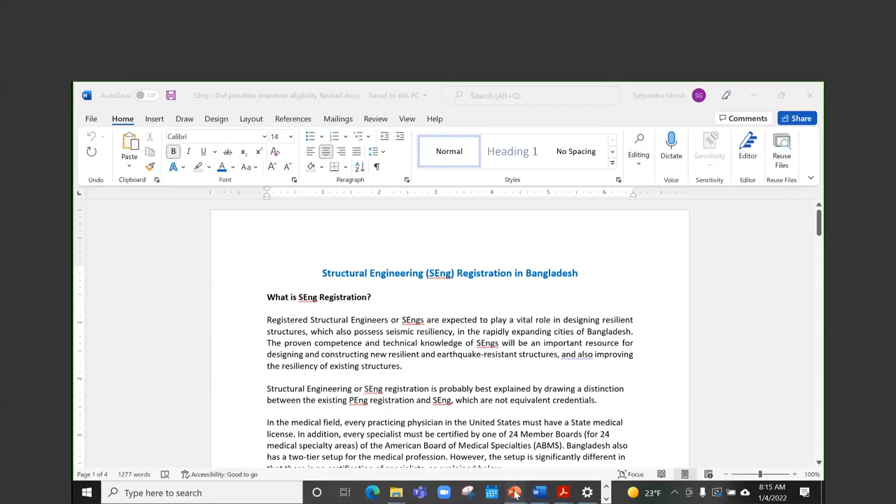So we have a two-part presentation today. The first part is just a general introduction to building codes. We thought that would be an appropriate beginning to the whole program.

Dr. Ghosh, first question. You're not on slideshow mode, or presenter mode. Oh yeah, okay.

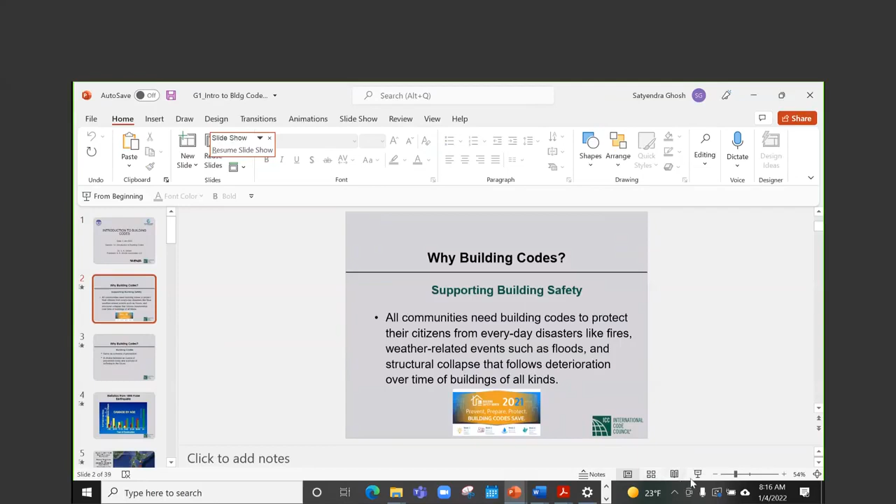The first question is, we are spending a whole lot of resources and effort in trying to get BNBC 2020 implemented first and then enforced. But why? What is the importance of building codes? Why building codes?

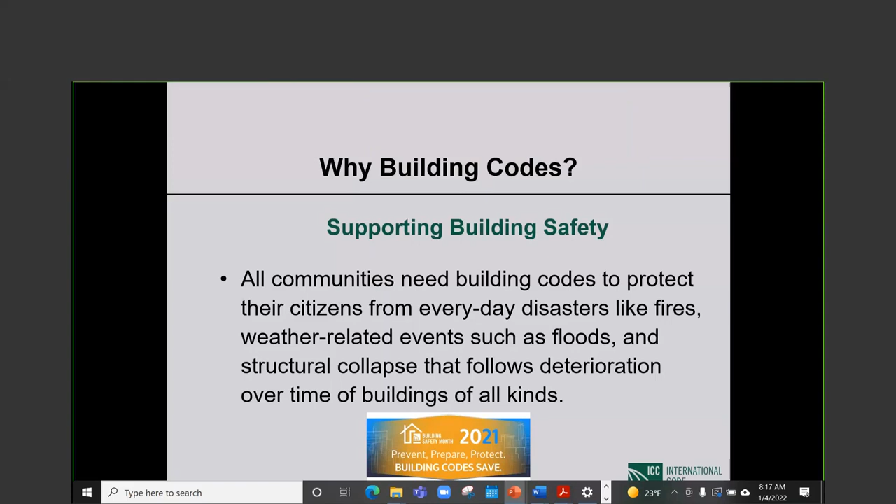So this is very basic. All communities need building codes to protect their citizens from everyday disasters like fires, weather-related events such as floods, and structural collapse that follows deterioration over time of buildings of all kinds. Age-related deterioration ultimately will destroy any structure, and to the extent that we can take steps to preserve structures to prolong their life, that also belongs in building codes.

Building codes serve as a means of prevention. This is truly in a very basic sense. Building codes prescribe preventive measures to keep bad things from happening. It provides us with a choice between an ounce of prevention today and a pound of suffering in the future. If we build code-complying structures, chances are very high that for many decades the structure will serve our purposes satisfactorily with minimal maintenance. But if we don't do things right in the first place, we do not comply with the code, we cut corners, then the consequences can be quite unhappy and may result in a whole lot of suffering.

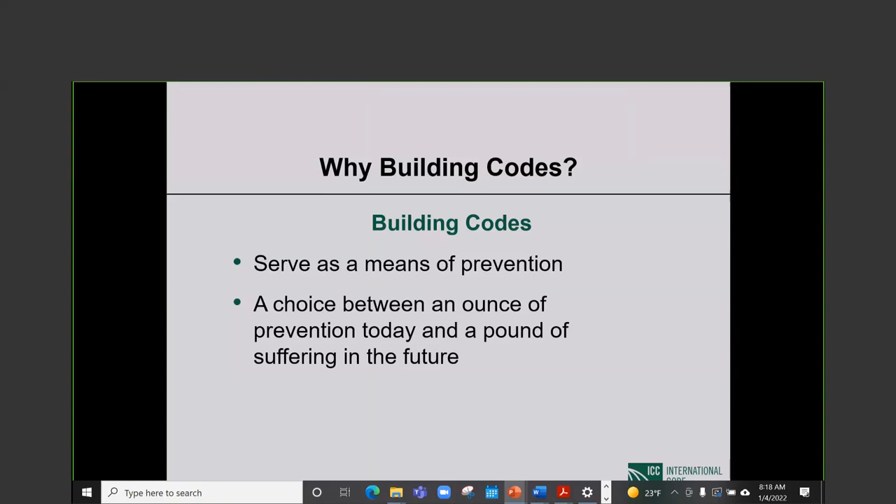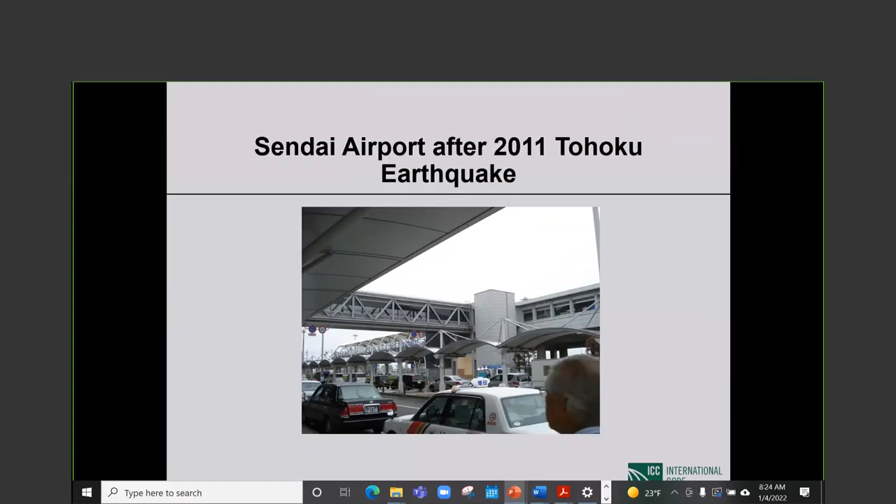We saw damage. It was not damage free, but considering the magnitude of the earthquake, the damage was very light indeed. When we came out of the airport waiting to be picked up, this is what the city looked like. You look at the traffic. There was essentially no sign of an earthquake having taken place just 3 or 4 weeks before. If you looked hard, yeah, there were signs, but there was basically not a whole lot to see.

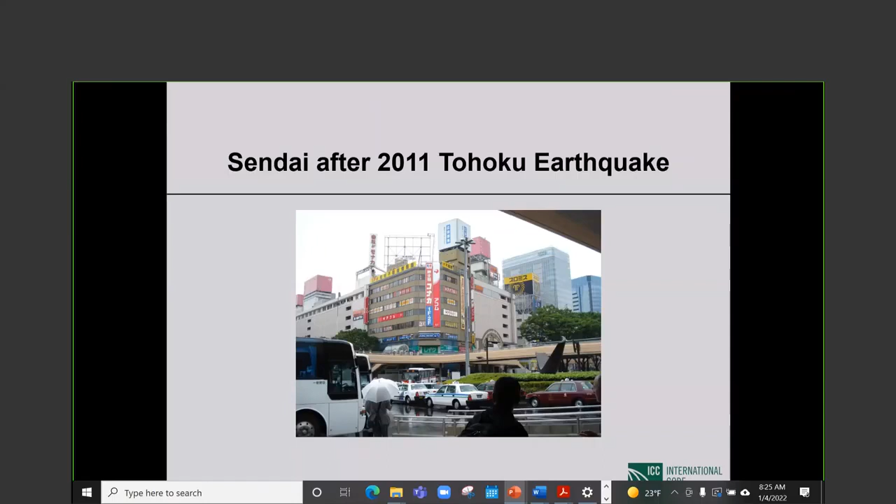So I'm not saying that there was no damage, but if you drove around the city, you might not see a whole lot until somebody pointed things out to you. And then you did see earthquake damage. Now, we were taken to the campus of Tohoku University just outside of Sendai, and many of the university buildings were old. This is one of them.

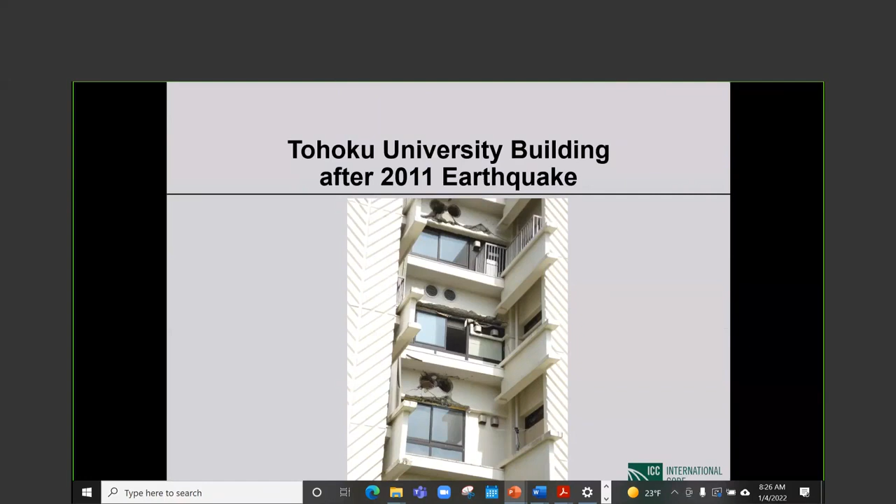These are shear walls that are coupled, as you will see in the next picture. These coupling beams between the shear walls had openings for some reason. I do not know why. And those suffered pretty much as expected, very major, very substantive damage. And then the columns of the building, this is an older building, the columns had the pre-1981 detailing. This we would call non-ductile detailing.

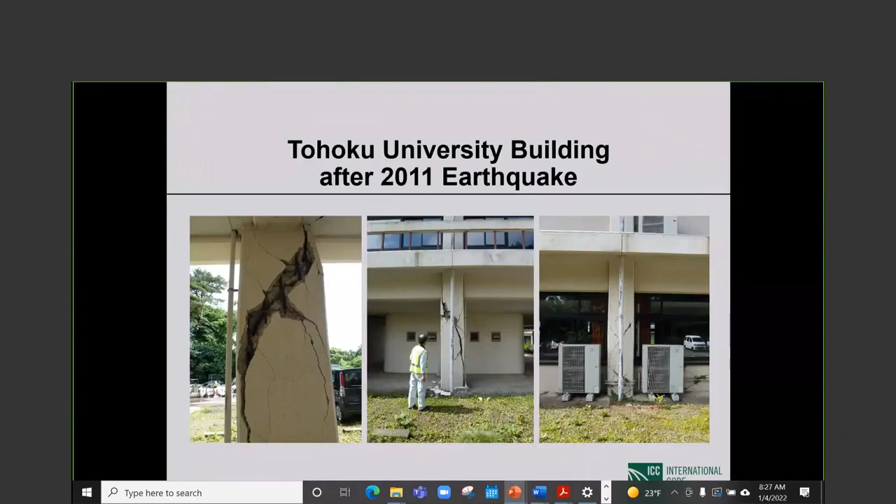The main feature of which is that you have plenty of longitudinal reinforcement, but hardly any transverse reinforcement. There are typically ties at 14-inch or so spacing. The ties are once around, there are no cross ties or anything, and the hooks at the ends are 90 degrees. Everything is wrong. And those columns always suffer shear or shear compression failure, as you see in these pictures. So in this older building, there was plenty of damage to be seen, but as I mentioned, buildings designed and built by the later codes did incredibly better.

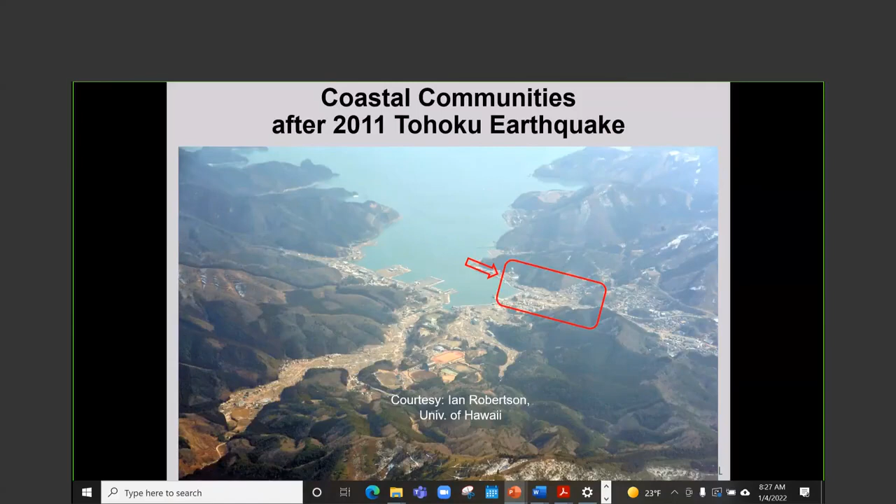The tsunami was a totally different story. All the coastal communities, there were fishing villages or fishing towns, and this is one of them. I don't remember the name now, Onagawa, something like that. You went to any of these places, and we went to many. It really is very depressing even to watch. All you saw was an occasional concrete building still standing up. When I say building, it is the skeleton of the building. Everything else is gone.

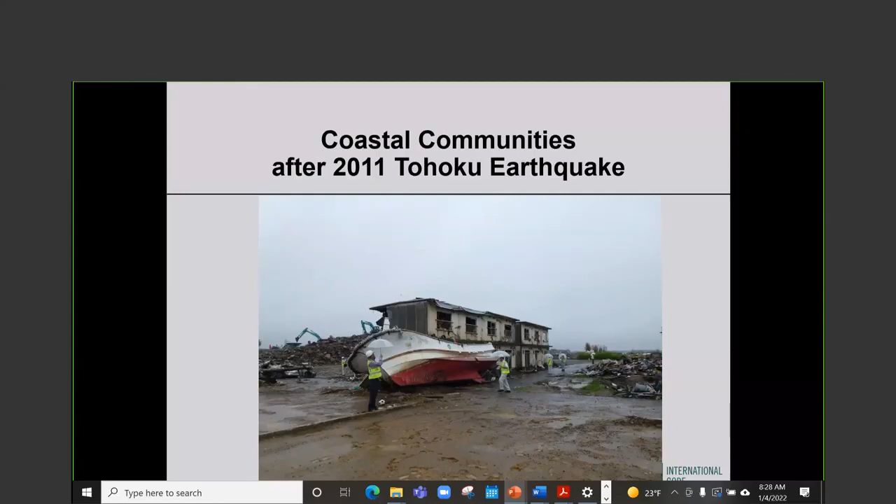People's possessions are all over the place. Children's shoes, family photographs, clothes. Typically they were collected in heaps, and other than some workers, there was no one around. It was total, complete devastation. In stark contrast with what happened as a direct result of the earthquake. So tsunami is a different story. We will not go into that today.

But my point in showing you everything so far was that Japanese building codes are technically sound. Much more importantly, they are very strictly enforced, and as a result of that, I would say all post-1981 structures, particularly post-1991 structures, have performed very, very satisfactorily in recent Japanese earthquakes.

Earthquake threat is not taken seriously in Bangladesh, at least by the public, although the World Bank seems to be very aware that it exists and that it may cause very, very serious problems.

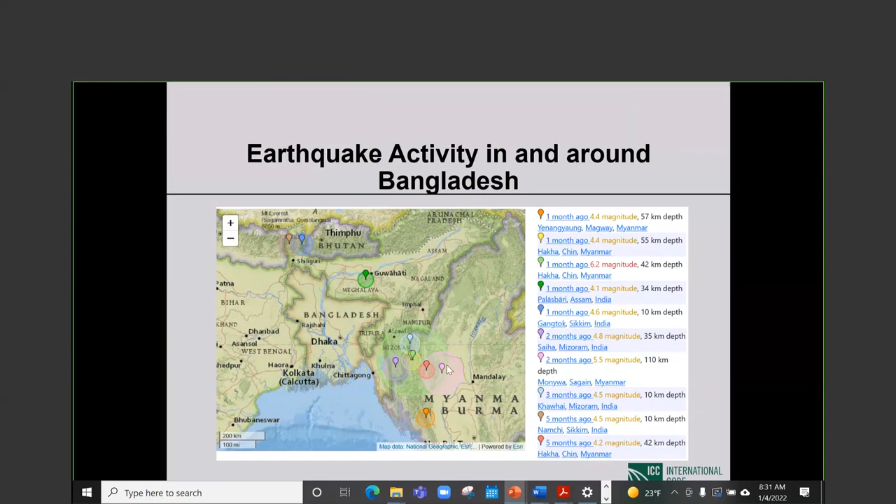And these are the epicenters of earthquakes in the last month or so. So there is earthquake activity going on. Luckily, the largest one in the last month has been 6.2, and the epicenter is far enough away, at least from Dhaka, not from the border of Bangladesh, but a larger earthquake closer in, you can easily appreciate, might cause much more severe consequences.

Earthquakes are natural disasters. The disaster that really has haunted the public in Dhaka and in Bangladesh is the man-made hazard of fires. I will mention only two: the Chawkbazar fire of 20th of February, 2019. This is what happened. A fire, and much of these things should not happen. That's the point. A fire started as a result of a road accident, of all things, between a pickup van and a private car. After the collision, a gas cylinder stored in the private car exploded.

The first place the flames hit was a chemical warehouse on the ground floor of a 5-story building, and the flames quickly spread through 4 other buildings, including a community center where a wedding party was on. The fire left at least 80 people dead and 50 others injured.

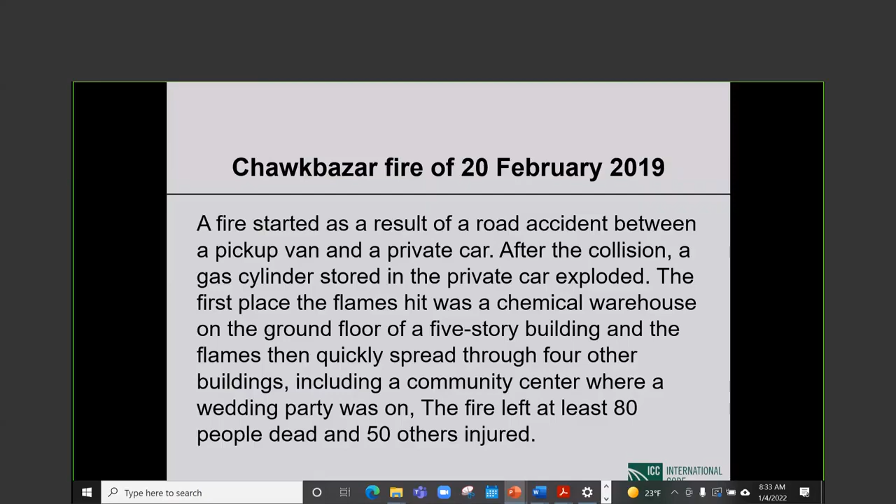So imagine this is a chemical warehouse on the ground floor of a building where people live in a congested neighborhood. This definitely is not permitted by any code. This should have been detected by enforcement personnel and totally gotten rid of. Obviously, that was not the case, and people died. Dying is kind of final. What also happens is people get injured and people become homeless. There are endless dire consequences to deal with by the families and by the authorities, and it's just a tragedy all around.

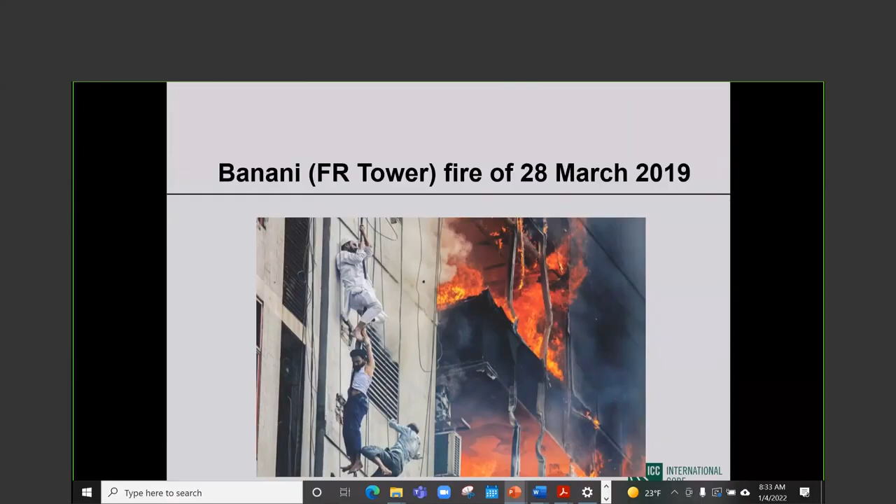The more recent, the FR Tower fire in Banani. This was March of 2019. The FR Tower, which was built before 2006, did not have a single fire protected staircase, and the main staircase was filled with choking smoke.

At just 0.6 meter, the spiral staircase outside, and 1.2 meter wide, the main staircase inside, the building's 2 exits were too narrow for people inside to leave easily. They were also blocked by obstructions that made the task even harder. Office workers able to reach the top of the building were rescued by Air Force helicopters.

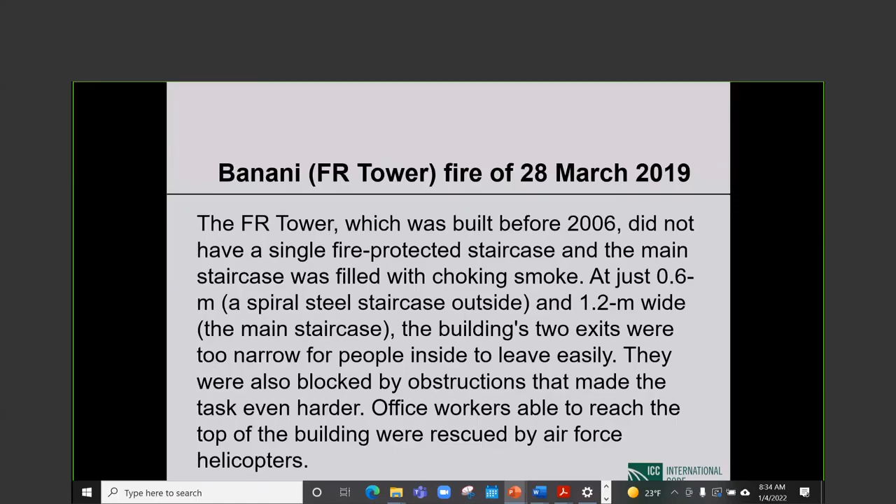This is now the telling thing. According to news reports, the Bangladesh Fire Department had sent 2 letters in the prior 2 years highlighting the dangerous lack of safety in the building. Authorities knew the multi-story block was unsafe. The tower building, in fact, was supposed to be just 18 stories high, but was illegally extended to 23 floors. All of you know all these stories, and even the details, but the point is that code violations lead to major tragedies that are totally avoidable.

Okay, why building codes? Building codes are minimum requirements. That is extremely, extremely important. Building codes always give us minimum requirements established by society that ensure an acceptable level of safety of building occupants and protection of property. That is not the primary aim of a building code, but protection of property is considered in formulating building codes. Minimum requirements established by society that ensure an acceptable level of safety of building occupants and protection of property.

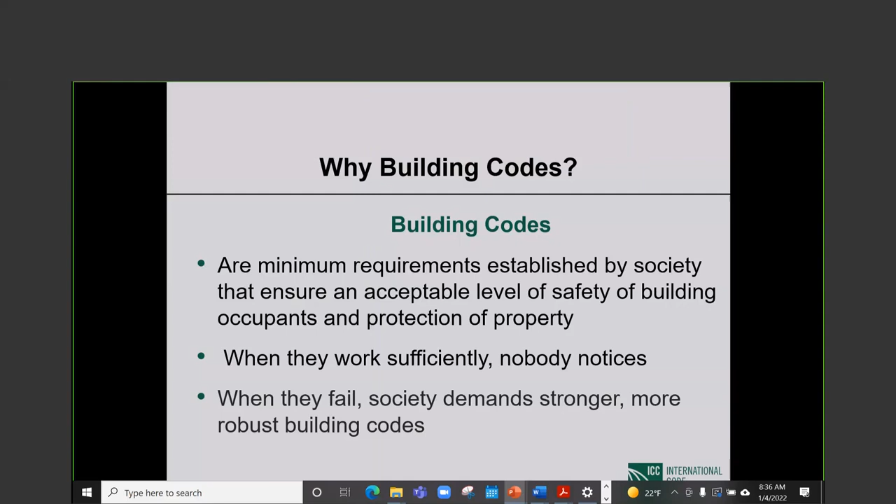When building codes work sufficiently, nobody notices. It seems like it doesn't have to be said, or that it is a trivial statement, but it is actually important. When building codes work, it's like when your body works, you take it for granted. It is only when it doesn't work that you get concerned, you pay attention, you do this, you do that. And it is the same thing. When building codes work, nobody notices. When they fail, society demands stronger, more robust building codes. And then we react and sometimes overreact and do things that need to be scaled back.

Evolution of building codes. The first known building code was the Code of Hammurabi. This is 2000 BC, roughly. And Hammurabi not only had a building code, he had a comprehensive code on essentially how life should be conducted in all its facets. And some of it is very interesting reading, just like the building code.

In the case of collapse of a defective building, the builder is to be put to death if the owner is killed by accident. So this is eye for an eye, tooth for a tooth kind of a thing. So the builder is to be put to death if the owner is killed by accident, and the builder's son will be put to death if the son of the owner loses his life.

The interesting part to me is no mention of the daughter or wife or anything. It's the builder, the owner, the builder's son, and the owner's son. I guess 2000 BC, that's how society was. But anyway, very simple concept. It is about building falling down, structural stability or failure, and the punishment is rather severe, as you can see.

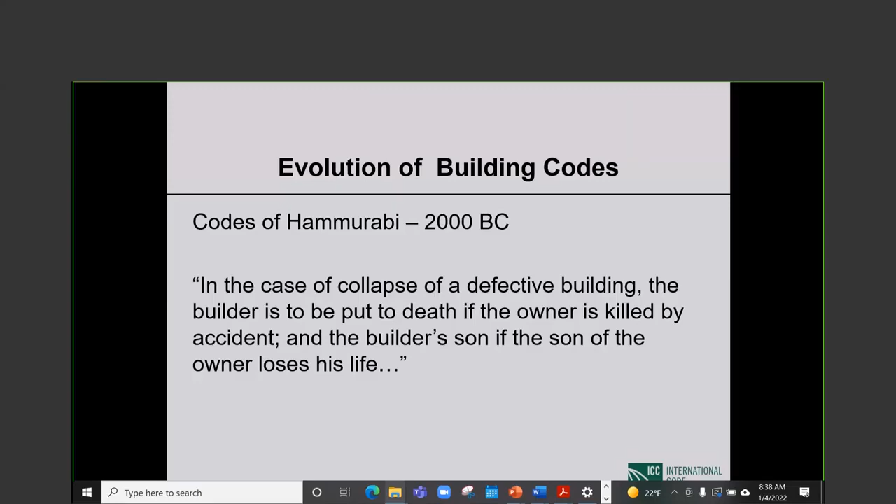Now, this is, I think, a very important slide. So we started with the Code of Hammurabi from the Babylonian times. Structural safety was the only thing that used to be considered. I don't know how much later fire safety became a very significant issue to be dealt with in building codes. So it was not just structural safety, it was fire safety. Then it became the health, safety, and welfare of the occupants of the building.

If you breathe the inside air, are you going to get sick? That kind of consideration. Okay. Or even like you have steps that cannot be easily seen, then people are likely to fall. There's a health hazard that you have created inside the building. So that kind of consideration came into codes. Later on, durability became a consideration that was also incorporated into codes.

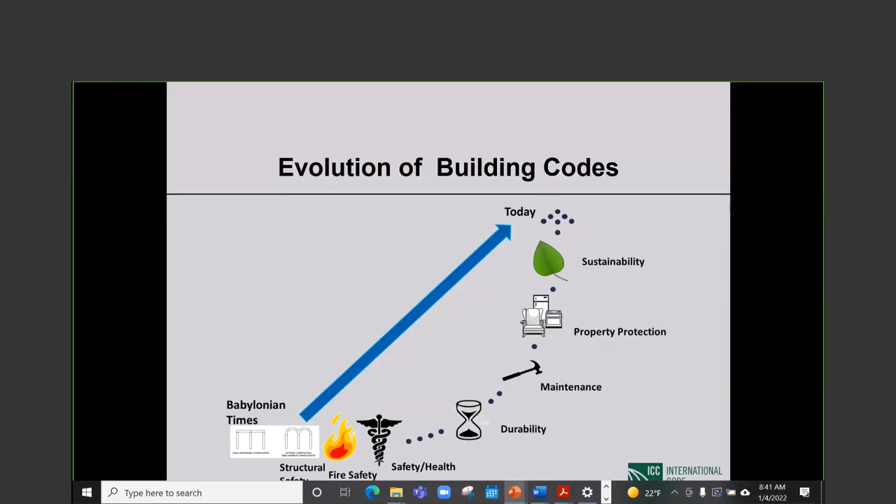And the final thing today is resiliency, not just seismic, but resiliency, meaning a whole community being able to bounce back quickly after a natural disaster. That is now seriously becoming a code consideration. And I expect that in the next 6 to 10 years, there will be major strides made, at least in the United States.

So today, the role of building codes is more holistic, and they have a greater impact on communities beyond that of safety of the building occupants. There is focus on higher performance, need to preserve scarce resources, energy, and water efficiency. Also, allow for innovation in building design, materials, systems, and methods. That has been coming in gradually, and all of these things can be discussed at some length, but obviously this is not the occasion.

So continuing on the same vein, today the role of the building code is more holistic. Affordability in housing, to support availability, to support affordability, the so-called low-cost housing. Even that has come into some codes. How to make livable structures at lower cost. Can the code do something to facilitate that? Then community needs for greater resiliency, which I mentioned already.

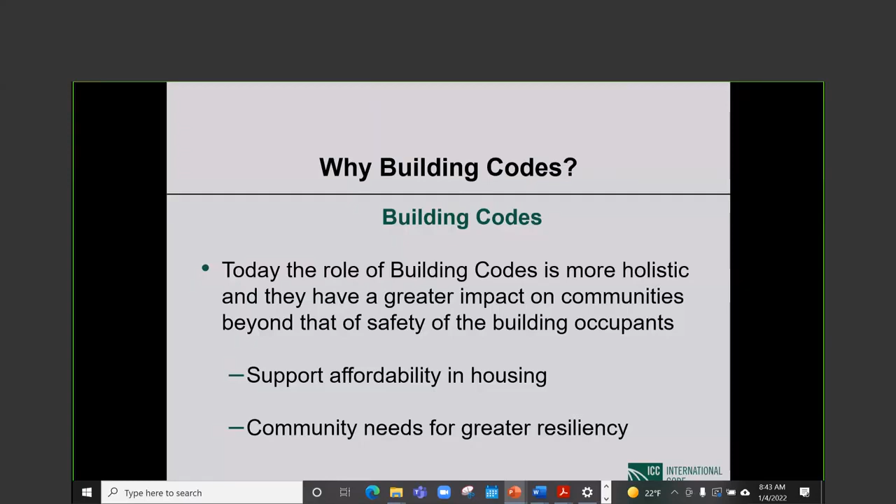Now, benefits of building codes. A building code provides safety and security for our loved ones. That's extremely, extremely important. In our S9 project, building code enforcement, we have come up with audiovisual material. Our consultant, Malay Chaki, a very talented man, has come up with a short movie where this safety of occupants is emphasized in a very, very nice way. I hope that you will have an opportunity to watch this short movie. So safety and security for our loved ones.

A building code protects one of our greatest financial assets. One's home is a major financial asset for most people, and the building code protects it, provides more resilient communities, helps preserve a country's building stock. I think these are obvious benefits.

Very, very importantly, a building code is not and cannot be a static document. A building code needs to be periodically updated in view of society's changing needs and values. That is important. Society's needs and values change, as we are all aware. New technology is always developing all around us. We need to take advantage. We need to acknowledge those things and adjust.

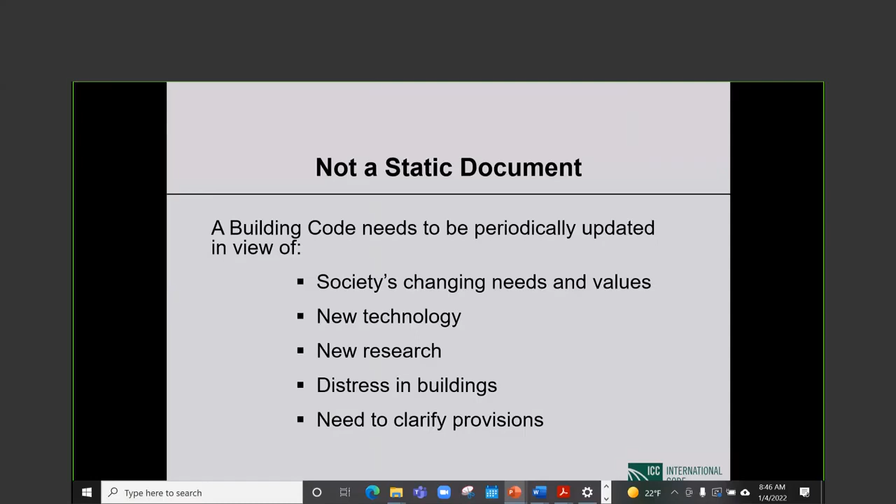ACI 318 for concrete design and construction. I cannot tell you how many times I have read many of the provisions there. Even now, when I read something, I may be confused. Clarity is very difficult to achieve in written language, particularly if the language is meant to be enforced. So anyway, I'll leave it there, but this last item is not trivial at all. A code provision, because it is meant to be enforced, because it has legal mandate behind it, has to be as clearly written as possible, has to be unambiguous to the extent possible, and that requires constant effort.

Then the next things are also extremely important. A building code applies to new buildings, and not to existing buildings. This is always the case in every country of the world. A new code edition becomes effective on a certain date. From that date on, all applications for construction permits must be for buildings complying with the new code edition. When a new code edition goes into effect, existing buildings need not be evaluated or modified in any way. This is very important. New codes get applied to an existing building or part of an existing building only if the existing building is modified in some way. It is added to, it is altered, and so forth.

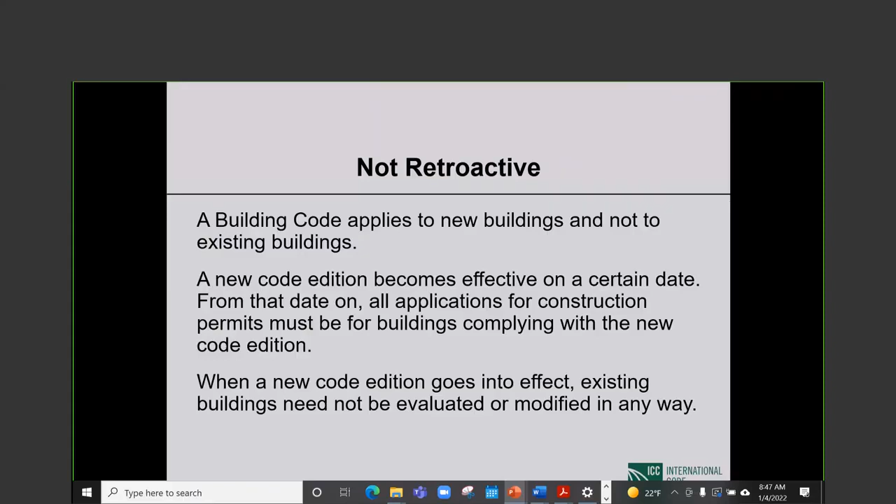If an addition or alteration is made to an existing building, depending upon the extent of the addition or alteration, the addition, the altered portion, or the entire building may have to comply with the code in effect at the time a permit for such addition or alteration is applied for. Everything said here is extremely important. So a new code does not apply to an existing building.

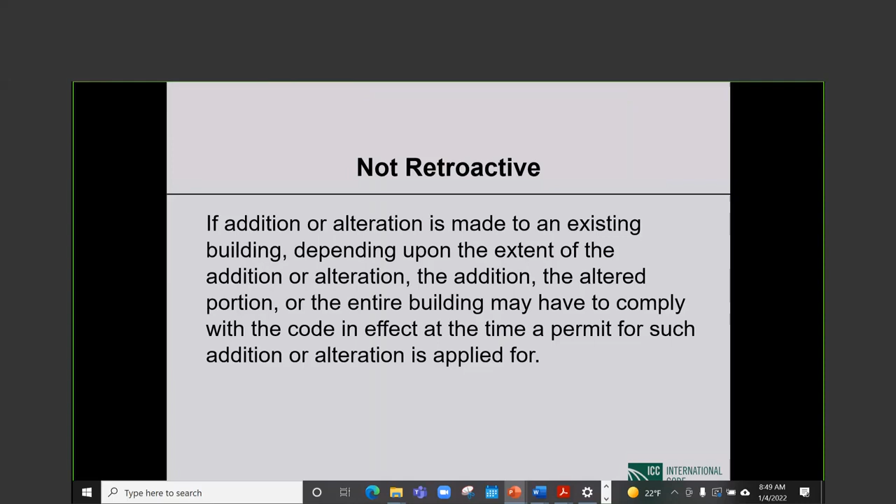Having said that, if an addition or an alteration is made to an existing building, depending upon the extent of the addition or the alteration, the addition itself, the altered portion, or if the addition or alteration is major, the entire altered building may have to comply with the code in effect at the time the permit for such addition or alteration is applied for. How, when is an addition so large that the entire building, including the addition, has to comply with the new code? These are typically referred to as triggers, and that goes into significant other territory that is not our subject today.

So, minimum requirements we talked about earlier. This is a repeat. A building code provides minimum requirements. A designer may and indeed should go above or beyond the code, that is, follow more stringent requirements, if in his or her judgment the added stringency is needed for safety and/or performance. This is extremely important. If in the engineer's judgment he should go beyond the minimum code, this is exactly what he's supposed to do. He is the engineer. The code is the minimum. What should be done to the structure should be decided upon by the professional; the code minimum is not always the right answer.

Then I title this "More is not necessarily better." I think all of you need to keep this in mind for all time to come. An over-reinforced concrete member performs much worse than an under-reinforced member in an overload situation. I have seen this in so many places, because reinforcing steel is more expensive than concrete. The layman's way of looking is, if you put more reinforcement into a column, you have a better column. You have got more for your money. That is absolutely not the case. So an over-reinforced concrete member performs much worse than an under-reinforced member.

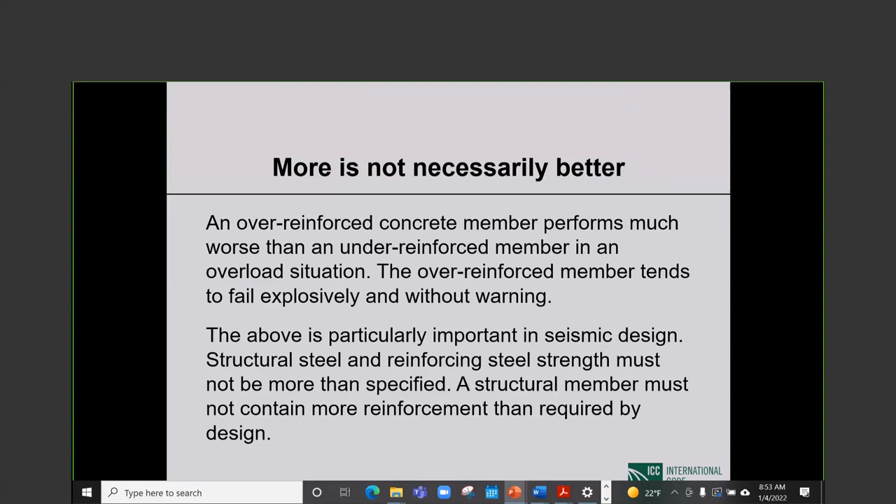The above is particularly important in seismic design. Structural steel and reinforcing steel strength must not be more than specified. If you specify grade 60 steel, you cannot just replace that with grade 75 because it is higher strength, so better. That will cause significant problems. A structural member must not contain more reinforcement than required by design. So again, all of these I could elaborate on, and there will be occasions when I will do that in this training program. But please do keep in mind, more is not necessarily better, and that is particularly true in earthquake situations.

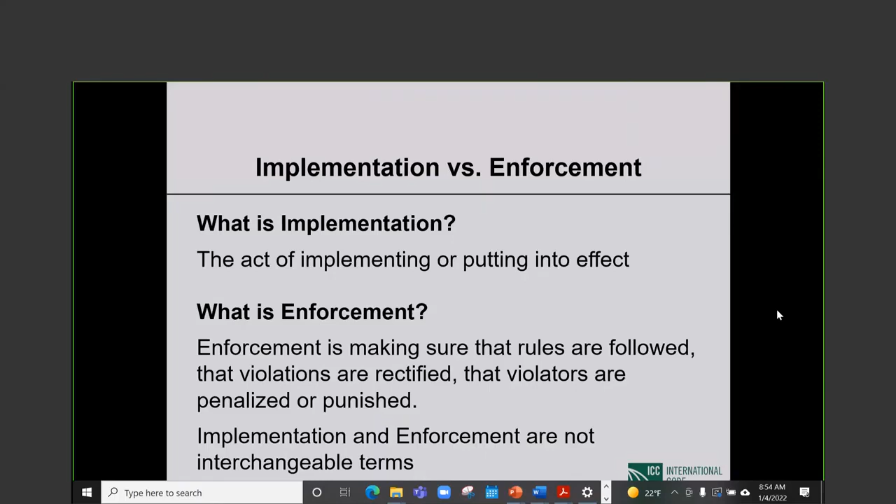Now, BNBC 2020, which is our code today, the gazetting of that document after a long wait happened on 18th of February of, it should be 2021. Last year. I don't know. That's a major mistake.

I'm sure I wrote it myself.

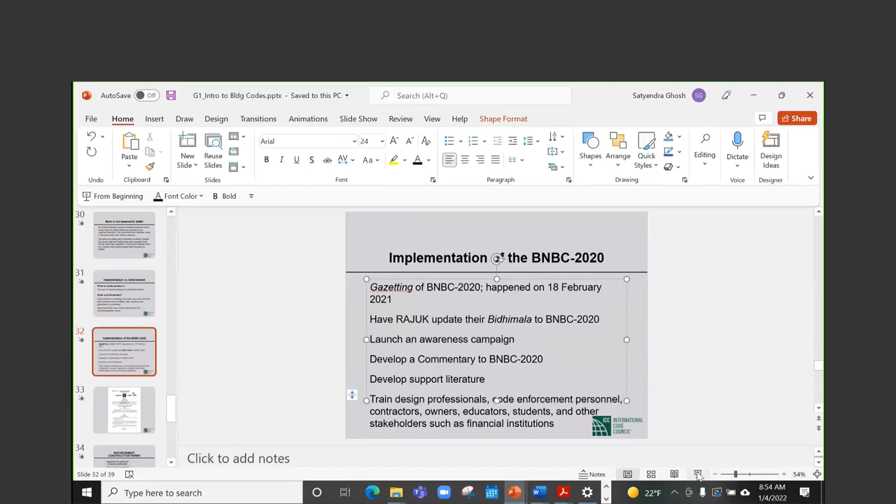But so to implement this document, Rajuk will need to update their Bidhimala to BNBC 2020, which is underway, I'm happy to say. I know that progress has been made, although the effort has not been completed. Launch an awareness campaign. We have various things going on. We have not emphasized the new edition versus the old edition kind of thing, which for professionals is important; this is something we probably should still think about.

From the beginning, we have felt that a commentary to BNBC 2020 is an absolute necessity. Professionals have told us so, and hopefully, as part of phase 2 of this URP Rajuk part, we will get to do that. Develop support literature, how to design using the building code. That is the role of support literature. It is not commentary. It tells you how to use the code in designing and constructing structures. That is needed. And then training of professionals at all levels. So all those are parts of implementation.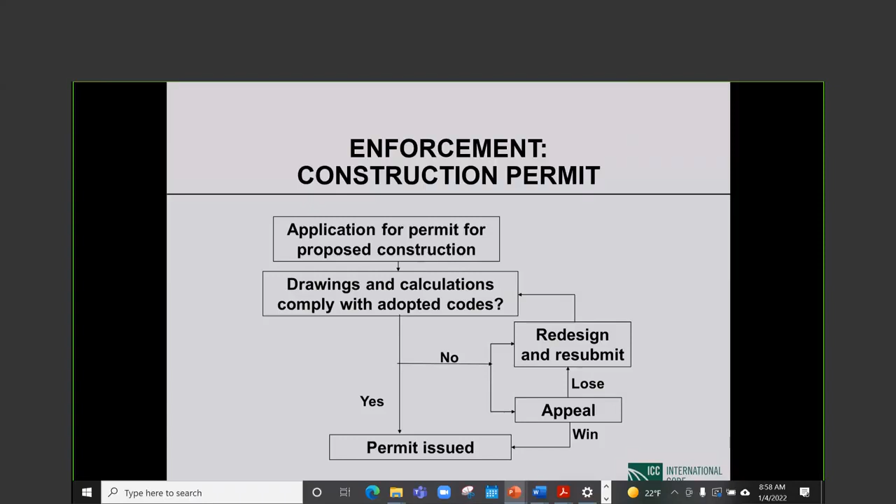So this part of enforcement depends on the ability of the jurisdiction to do a proper plan check. I do want to emphasize that. Now, we found that there is no fire safety plan review for residential buildings up to 6 stories in height in Bangladesh. Residential buildings up to 6 stories may have 500 people in one building sleeping at night. No fire safety plan review for those buildings. Not even an indirect requirement to meet BNBC fire safety requirements. This we thought was a so-called gaping hole.

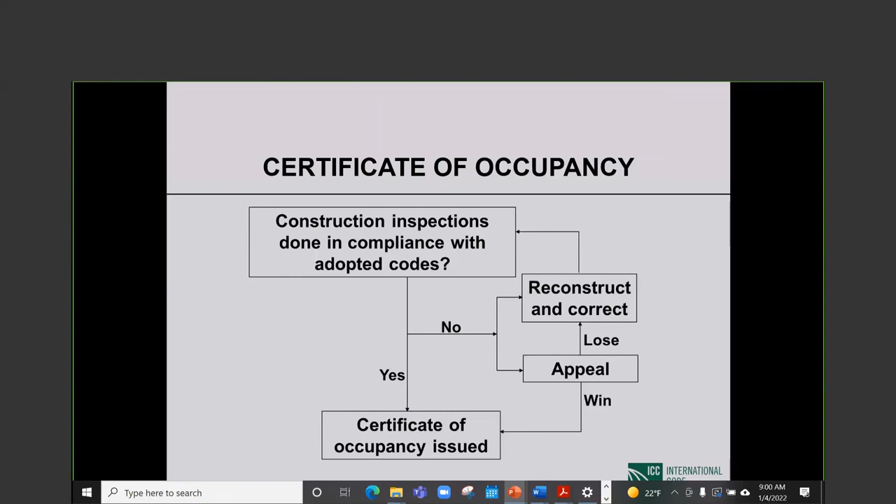Second part of enforcement, we talked about design. Now you have a permit, so now it is construction. Construction has to be inspected. The inspectors have to make sure that the construction is in accordance with code requirements. If that is so, then the inspector will so declare and the applicant will get what is called a certificate of occupancy. Then he can use the building for whatever purpose it was erected. If, however, the inspectors detect violations of the code, then a certificate of occupancy will be denied, and they will have to rectify all the problems found and go back to the jurisdiction and get a certificate of occupancy. So this inspection is also a very integral part of code enforcement.

We found that there is no fire safety inspection for residential buildings up to 6 stories in height in Bangladesh, or at least in Rajuk jurisdiction. So we have made a whole lot of recommendations in our enforcement program report for Project S9.

One volume of this 4-volume report has the recommendations only. I think the recommendations are written in understandable terms, and two of the major recommendations concern plan review and inspection of structures. In both cases we have said that in view of Rajuk's limited manpower and resources, third-party plan checkers and third-party inspectors should be employed to enhance the process. The third-party plan checkers and inspectors will be an extension of Rajuk. They will have no power of their own that is not delegated by Rajuk. So we have elaborated on every aspect of our recommendation, and I will leave it at that.

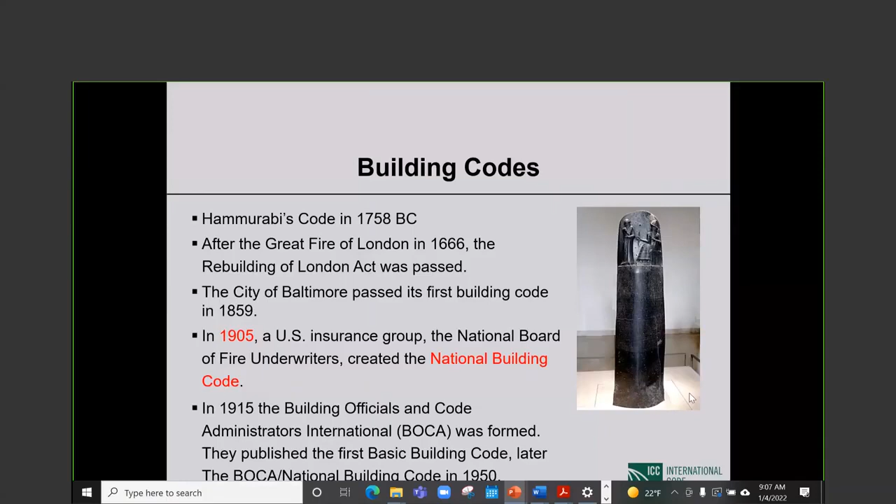This started in 1915 when the Building Officials and Code Administrators International, BOCA for short, was formed. This is a so-called model code group. They published the first so-called basic building code in 1950, and this basic building code became the BOCA National Building Code starting somewhere in the 80s after the original National Building Code died. So the National Building Code issued by the National Board of Fire Underwriters was discontinued. BOCA took up that name, National Building Code, but to distinguish their code from the original, they started calling it BOCA/National Building Code. And that's how it was known until its last edition dated 1999.

The second model code group, International Conference of Building Officials, was founded in 1922. So the first one in '15, second in '22. They published the Uniform Building Code in 1927. That was the code adopted by, let us say, roughly half the western half of the United States.

Because the seismic design provisions of this code were supposed to be kind of state of the art, this code had very significant worldwide influence. I should say it continues to have. There are places in the world where they still swear by it. You go to Iran, that's pretty much the story today, that the code they are wedded to is the Uniform Building Code. With all the fighting with the US and so forth, that's still the code they use.

So the BOCA building code was adopted roughly in the northeastern quarter of the country, the uniform building code in the western half of the country. Then there was a third model code group, the youngest one, formed in 1940, called the Southern Building Code Congress International.

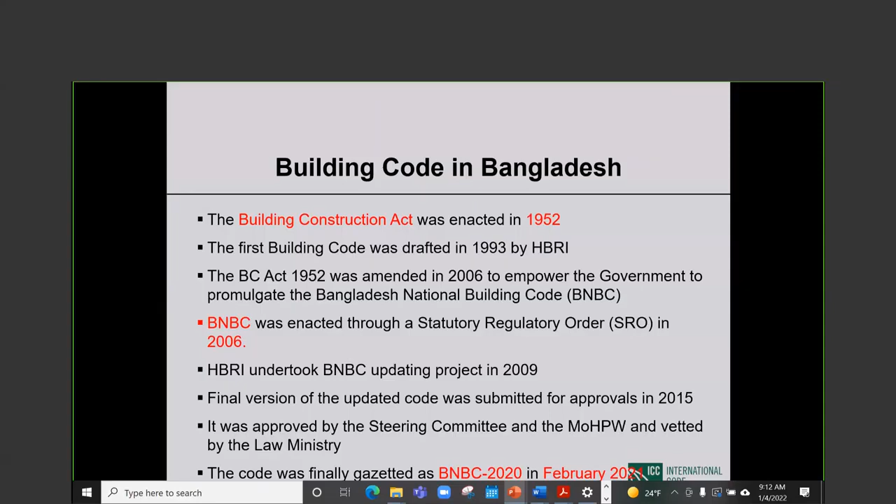At the same time, this is the only time I will throw this in: this code, because it was started in 2009, is already outdated in many ways and badly needs updating in certain areas, which effort should get underway hopefully soon.

The purpose of the BNBC is to establish minimum standards for design, construction, quality of materials, use and occupancy, location and maintenance of all buildings within Bangladesh in order to safeguard life, limb, health, property, and public welfare.

Building code is not meant for the general public. This is important. A building code is not printed for just anybody to read. This is not something you take to bed to read before sleep comes to you. It's not that kind of a document. Building code is written for professionals, and it's like law books or medical books. Unless you have a certain background, it will not mean much to you, and that needs to be kept in mind. It is written for professionals with a certain background.

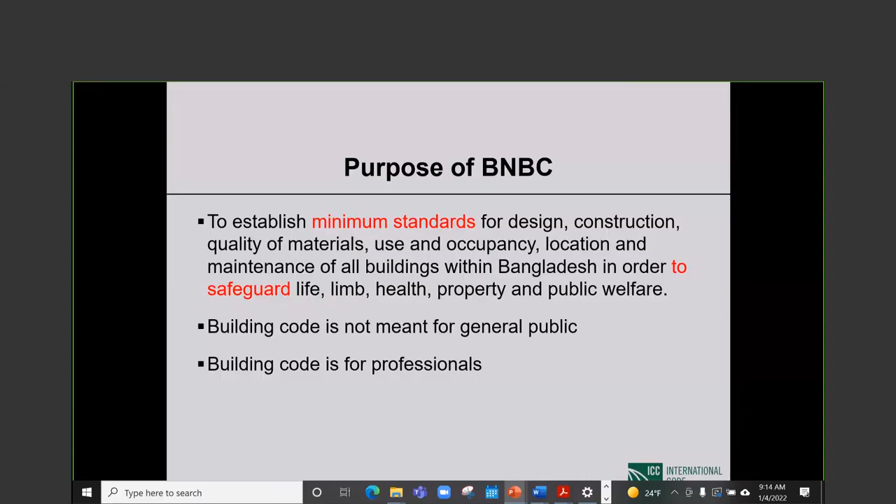Definition of building: any permanent or semi-permanent structure which is constructed or erected for human habitation or for any other purpose, and includes but is not limited to the foundation, plinth, walls, floors, roofs, stairs, chimneys, fixed platform, veranda, balcony, cornice, projections, extensions, annexes, etc.

A few of Dr. Rakib's slides I have modified. This one I have not modified. This is the exact language he had there. It is probably taken from BNBC.

Anyway, building also includes the sanitary, plumbing, electrical, HVAC, appurtenances, and all other building service installations which are constructed or erected as an integral part of the structure. So all of that is building.

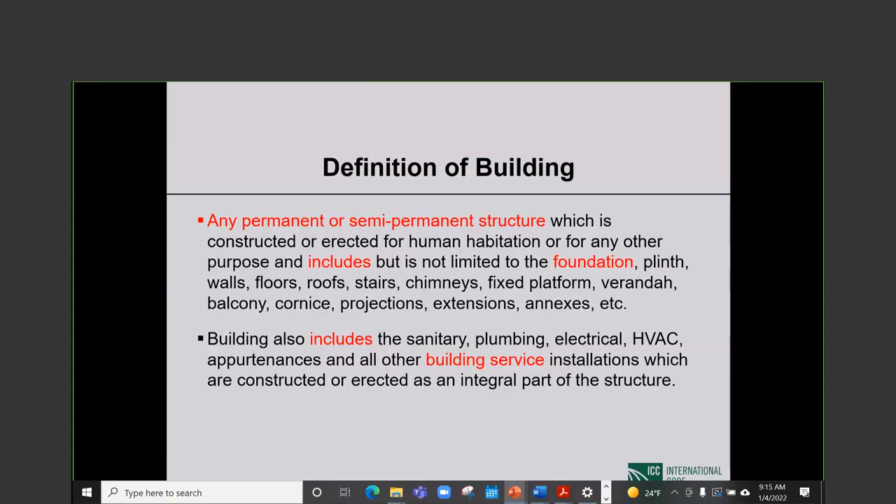Now here we make a distinction between buildings and non-building structures that I will not go into right now. So this definition of building will pretty much include non-building structures as I read it.

BNBC, I think all of you know, is in 3 volumes. Volume 1 has parts 1 through 5. Part 1 is scope and definition. Part 2, administration and enforcement - a very, very important part of the code, not to be minimized. People see administration and enforcement, they move on, but that is not the right thing to do.

So this part 2 really needs to be read and understood. Part 3 is general building requirements, control and regulation. Part 4, very importantly, is fire protection. Part 5 is building materials, as opposed to design using building materials.

Building materials themselves. Volume 2, all of Volume 2 is just Part 6, structural design. Actually, I shouldn't say just Part 6 - that is a huge part that talks about structural design and all the materials that are allowed to be used in buildings.

Then Volume 3 has Parts 7, 8, 9, and 10. Part 7 is construction practices and safety. Part 8 is building services that we were talking about, electrical, mechanical, energy, all of that. Part 9, very importantly, is addition, alteration to, and change of use of existing buildings. Part 10 is signs and outdoor display.

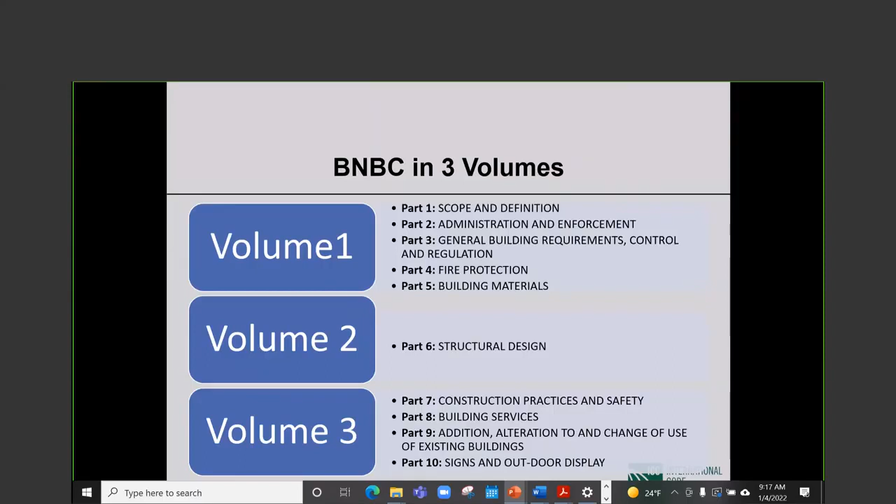In US code, signs and outdoor display are not given this kind of full treatment. I looked into it at one time. I believe this is modeled after the Indian code, and it does make sense, but this part is kind of different from what you will see in US codes.

Part 2, administration and enforcement - the part that I said is quite important. Part 2 has 3 chapters: purpose and applicability, establishment of authority, etc. This stuff is important. And permit and inspection.

Under establishment of authority, BNBC says the government may establish the Bangladesh Building Regulatory Authority, BBRA. That has not happened, but the code gives provision for this. The authority shall consist of 5 members, which we have not gone into in the slide. The authority, BBRA, shall designate specific geographical jurisdiction as the office of the building official. So Rajuk could be, for instance, the office of the building official.

The building official shall exercise his power and responsibilities through a building construction committee. That's how it works at Rajuk and the other authorities that we have been familiar with.

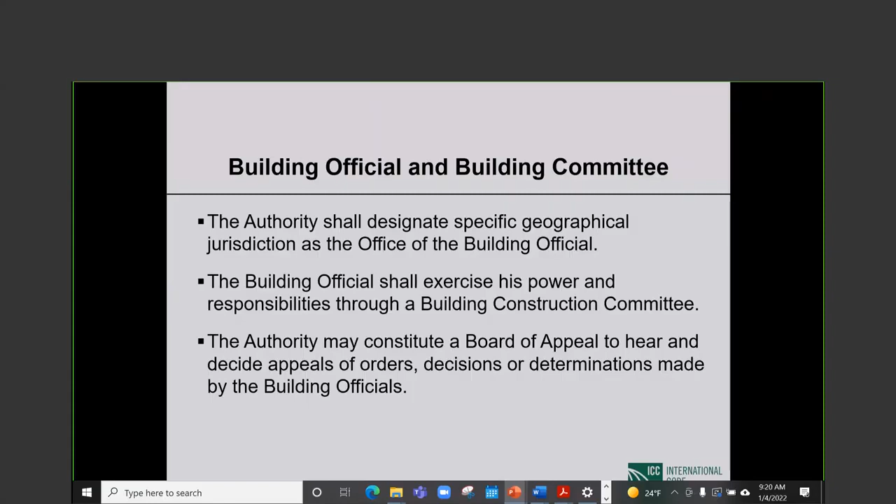Jurisdiction of building officials. Remember, the language was: BBRA, the authority, shall designate specific geographical jurisdiction as the office of the building official. So this is where this list comes in.

Areas under the master plan of Rajuk, the authority is Rajuk. Areas under the master plan of Chittagong Development Authority, the Chittagong Development Authority is the authority. Similarly with Rajshahi Development Authority, with Khulna Development Authority - areas under any development authority, the relevant development authority is the authority, or the office of the building official. Areas under any city corporation, the authority is the city corporation. Areas under any municipality, the municipality is the jurisdiction.

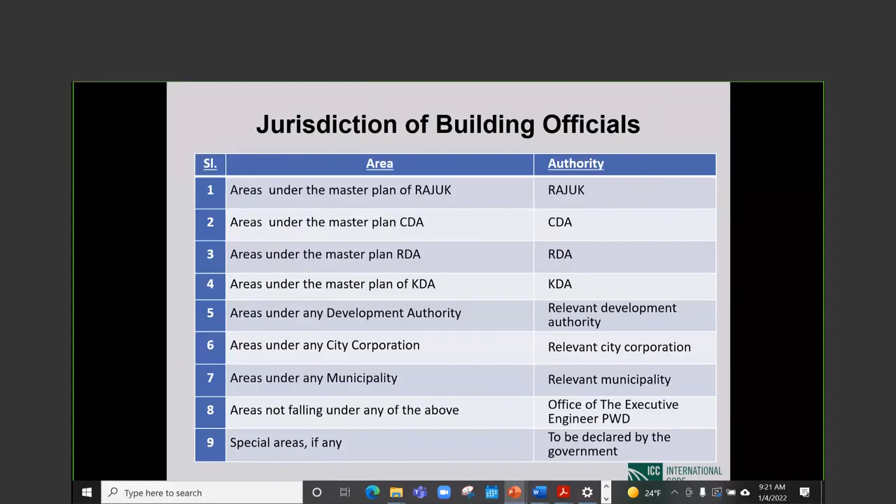Areas not falling under any of the above, very importantly, the Office of the Executive Engineer of PWD is the authority. Where there is no development authority, corporation, or municipality, the Office of the Executive Engineer of PWD is the authority. For special areas, if any, to be declared, the government decides case by case who the authority would be.

Types of permits and building categories. First of all, the permits - there are a number of permits depending upon the structure that may have to be taken out. Land use certificate: validity of that certificate is 24 months. You have to do something on the land within that period, otherwise the certificate lapses and you have to take out another one.

Rajuk is supposed to, upon proper application, give it to you within 15 days. Large and specialized project permit: validity 24 months, time that Rajuk has to process and issue it to you is 45 days. Building permit: validity 36 months - so this permit, without which you cannot construct, is valid for 36 months. If you don't do anything in that time, it lapses, and Rajuk has 45 days to process the application and issue the permit.

Occupancy certificate has perpetual validity, although I think it has to be renewed every 5 years - I believe that is the case, or maybe it is our proposal, a little bit anyway. So the time that Rajuk has to issue it is 15 days.

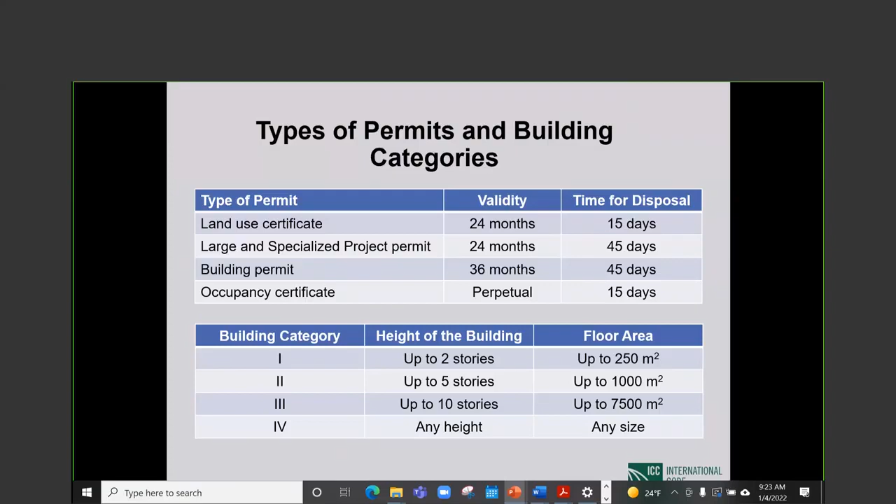Category 4. Okay. So then BNBC very importantly gives you this table where it spells out the professionals that can do certain things and how much experience that professional has to have. So if it is a survey, a diploma engineer can do the survey for category 1 buildings up to 2 stories and, what was it, 2 stories and how many square meters? 2 stories and 250 square meters.

There are really no requirements, experience requirements for the professional. But if it is a category 2 building, the diploma engineer has to have 3 years experience. And for category 3 and 4, the 3 years remains unchanged. Soil testing can be done by a civil engineer. For category 2 buildings, 2 years of experience, but for category 4 buildings, unlimited height, unlimited area, 5 years of experience.

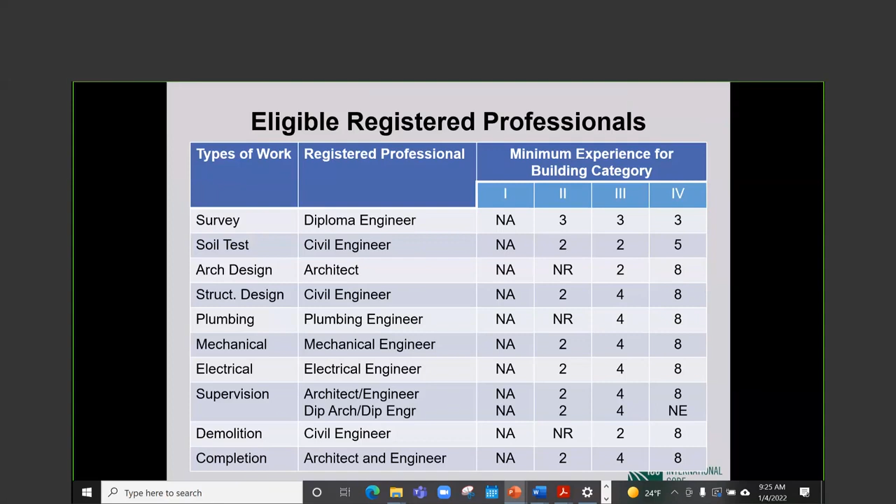Structural design has to be done by a civil engineer, 2 years experience in the case of category 2 buildings, 4 years experience in the case of category 3 buildings, 8 years experience in the case of category 4 buildings. So you get the idea. This type of a table is definitely not in any US code, but I think this serves a very, very good purpose. Okay, so everything is spelled out, and the table number is not on the slide, but this is a table directly in BNBC 2020.

For many things, a building permit is not needed, mainly because they are really not buildings. Railways, national highways, national waterways, national gas grid, national power grid, major ports, airways and aerodromes, telecommunications, the towers and so forth, electronic broadcasting services, any other services which the government may declare to be essential to the community.

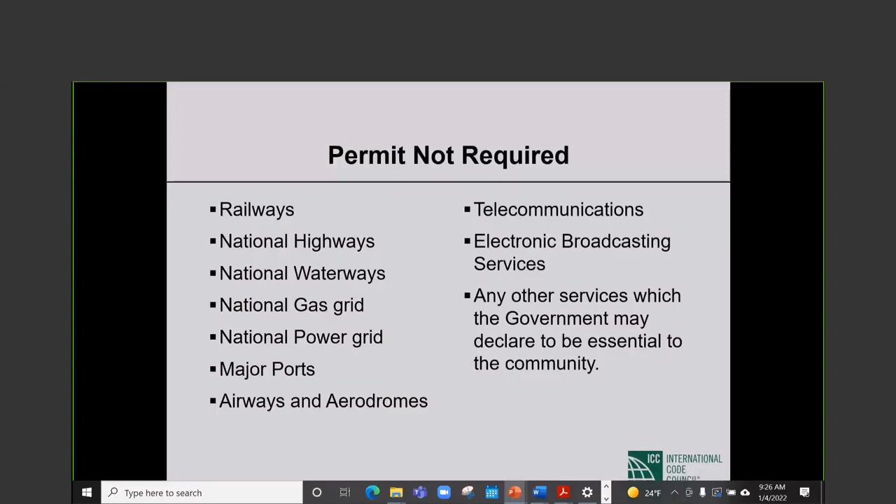Responsibilities of the owner. This is spelled out in BNBC. Some of this stuff is kind of important. The owner shall be responsible for carrying out the work in conformity with this code. Okay, that's the owner's responsibility. The owner is ultimately responsible for code compliance. It's not the people that the owner hires. Design, execution, and supervision work shall be carried out by authorized registered professionals. Owner shall allow the building official to enter the premises. This is required. This is his responsibility. The owner shall obtain permit as may be applicable. That again is owner's responsibility.

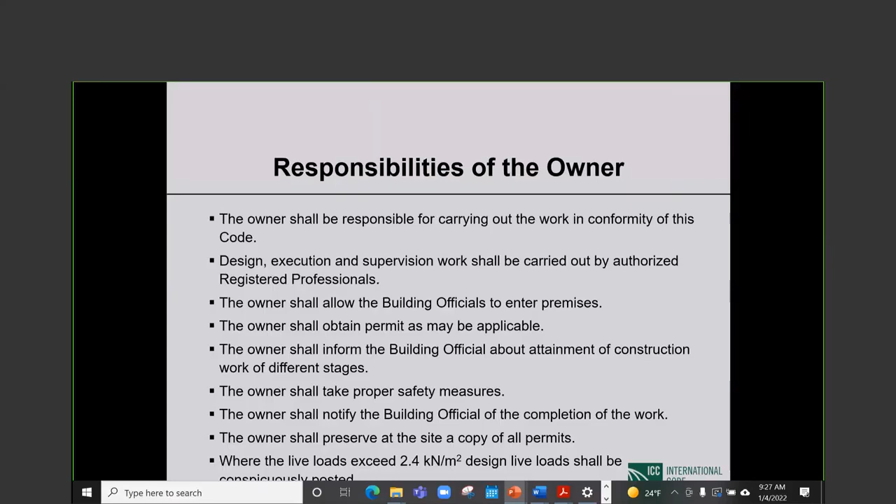The owner shall inform the building official about attainment of construction work at different stages, like stage by stage completion kind of thing. Should keep the building department apprised. The owner shall take proper safety measures, very, very important. The owner shall notify the building official of the completion of the work. The owner shall preserve at the site a copy of all permits. Where the live load exceeds 2.4 kilonewton per square meter, designed live load shall be conspicuously posted. This is a code requirement. Heavy live loads.

Unsafe buildings. All buildings that constitute danger to public safety or public property shall be declared unsafe by the building official. In case the owner fails, neglects, or refuses to carry out the repair or improvement of an unsafe building, the building official shall cause the danger to be removed either by demolition or repair, the cost of which shall be borne by the owner. Okay, so these are pretty significant powers being given to the building official, as you notice. Now, this results in litigation and all kinds of things, but building official does have the power.

If the building official determines that an unsafe building constitutes imminent danger, the building official shall at once cause such building to be rendered safe or removed. I think this kind of power given to the building official makes a lot of sense. This is public safety. At the same time, you know, this kind of determination is not easy, and these things tend to get messy. The building official may also get the adjacent structures vacated and protect the public by an appropriate fence.

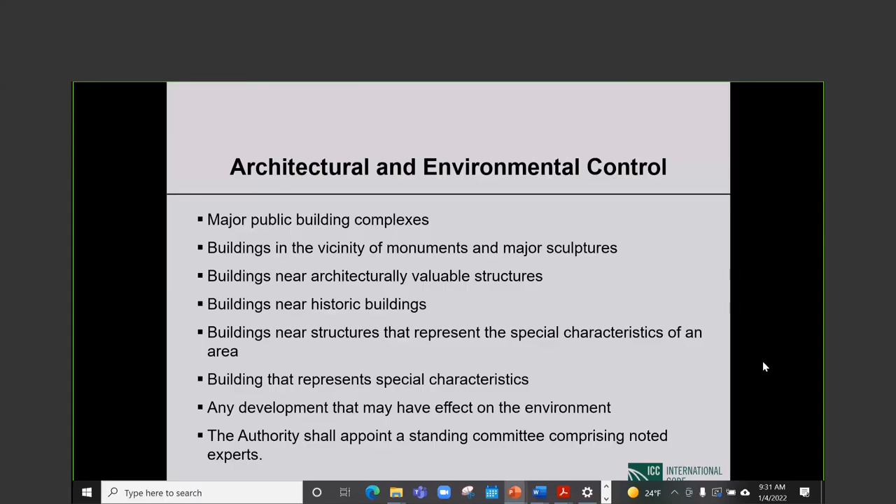Okay, we come to part 3, which is general building requirements, control, and regulation. Chapter 1 of part 3 is general building requirements. Chapter 2 of part 3 is classification of buildings based on occupancy. This tends to be very important for many things you need to do. Also, classification of building construction type based on fire resistance, and then energy efficiency and sustainability.

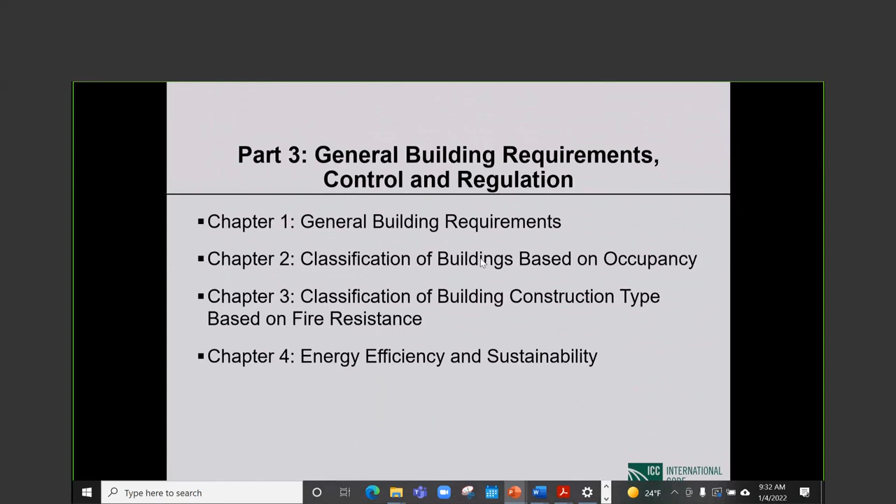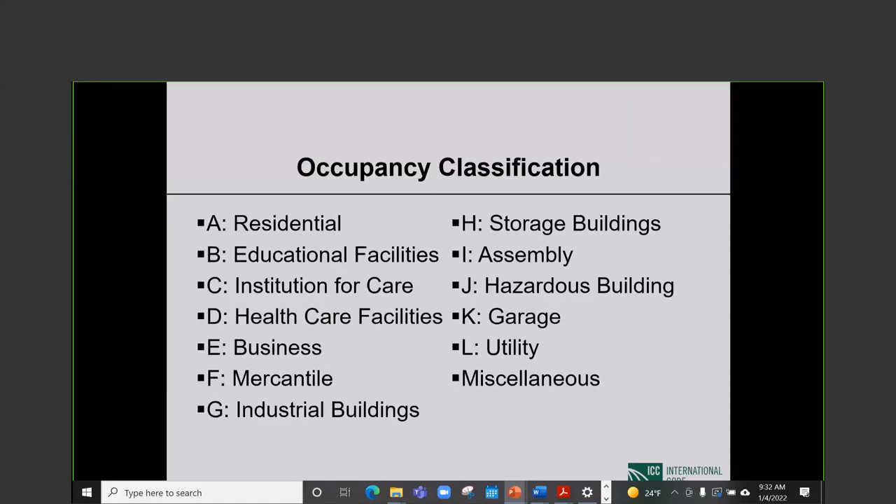So classification of buildings based on occupancy, that's what we are talking about here. So residential buildings, that would be type A, educational buildings, institution for care, healthcare facilities, business occupancy, mercantile, industrial buildings, storage buildings, assembly buildings, hazardous buildings, garages, utility, miscellaneous. Okay, so those are the classifications based on occupancy, and depending upon what classification you have, you may be subject to different regulations in the code.

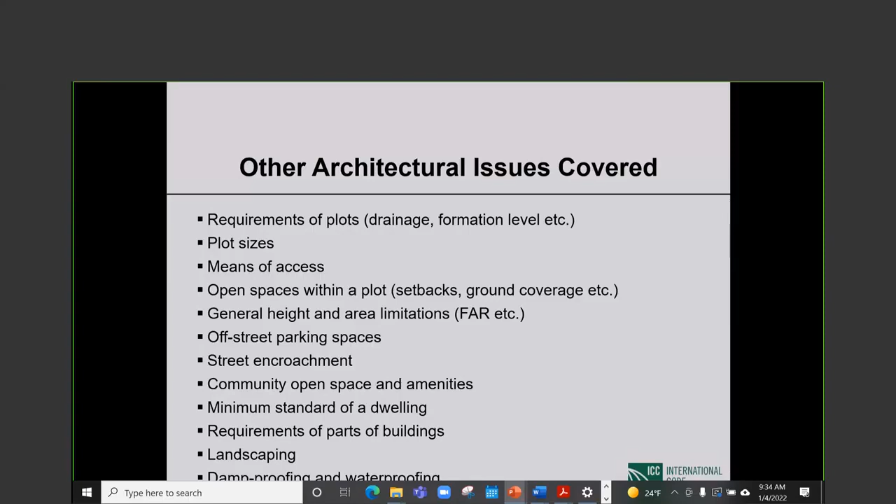Other architectural issues covered: requirements for plots, drainage, etc., plot sizes, means of access, open spaces within a plot, which would include setbacks, ground coverage, etc. General height and area limitations, the floor area ratio falls under that. Off-street parking spaces, street encroachment, community open space and amenities, minimum standard of a dwelling, requirements of parts of buildings, landscaping, damp proofing and waterproofing. Okay, all of that is covered in BNBC 2020, which is a pretty comprehensive document.

Energy efficiency and sustainability. All kinds of things are popping up all the time. So energy efficiency and sustainability, the scope includes: incorporate building concepts having a positive environmental impact and encourage sustainable construction practices, allowing efficiency and conservation of energy, water, and building materials, and to promote resource efficiency. It's kind of a complicated sentence, but it tells you quite a bit.

So incorporate building concepts having a positive environmental impact. That's understandable as it is. Encourage sustainable construction practices, allowing efficiency and conservation of energy, water, and building materials, and to promote resource efficiency. The efficiency may have been said one too many times, but you get the idea.

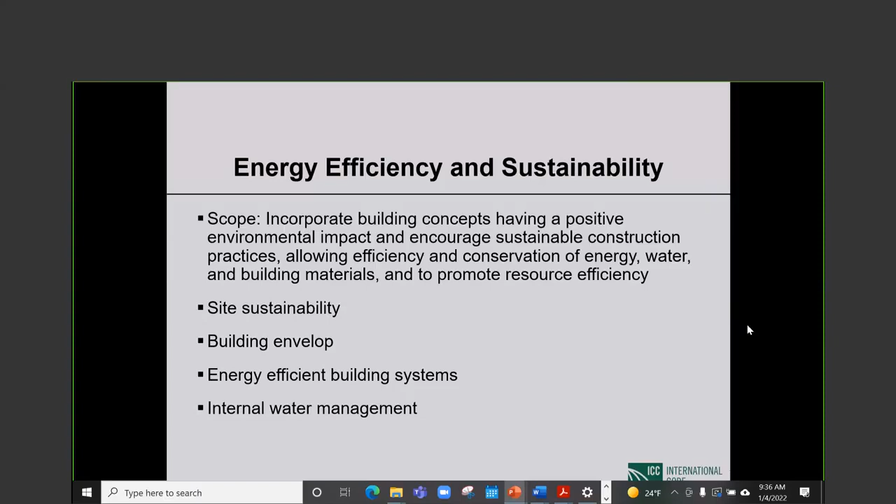Then site sustainability is covered in BNBC, building envelope. That is a huge subject. Building envelope has to keep the weather out. Water must not get in. All of these things are much easier said than done. Energy efficient building systems, internal water management. Just the list gives you an idea of how many things are involved in a building.

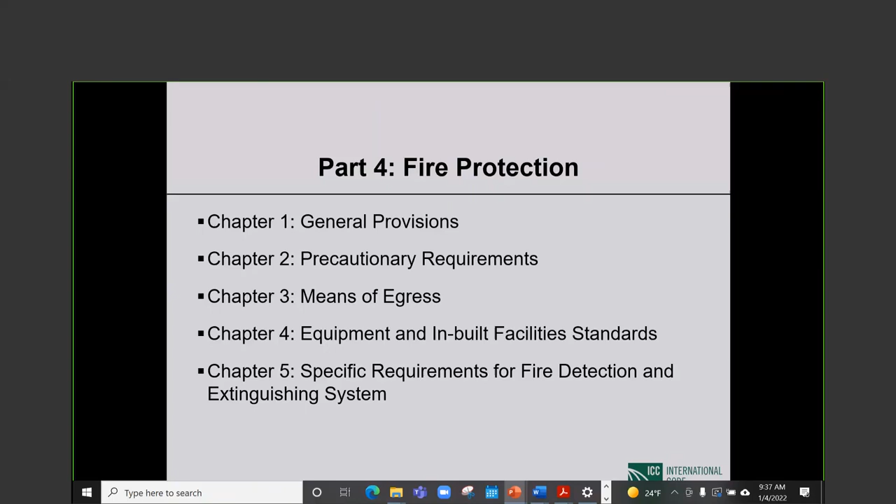So fire protection, Dr. Rakib didn't go into details in this slide set, but these are the topics covered. And some of these are huge topics, means of egress, for instance. Anyway, so in part 4, we have chapter 1, general provisions, chapter 2, precautionary requirements, chapter 3, means of egress, chapter 4, equipment and inbuilt facility standards, chapter 5, specific requirements for fire detection and extinguishing system. So pretty comprehensive requirements, although this may not be the most comprehensive if you look at codes of the United States and so forth.

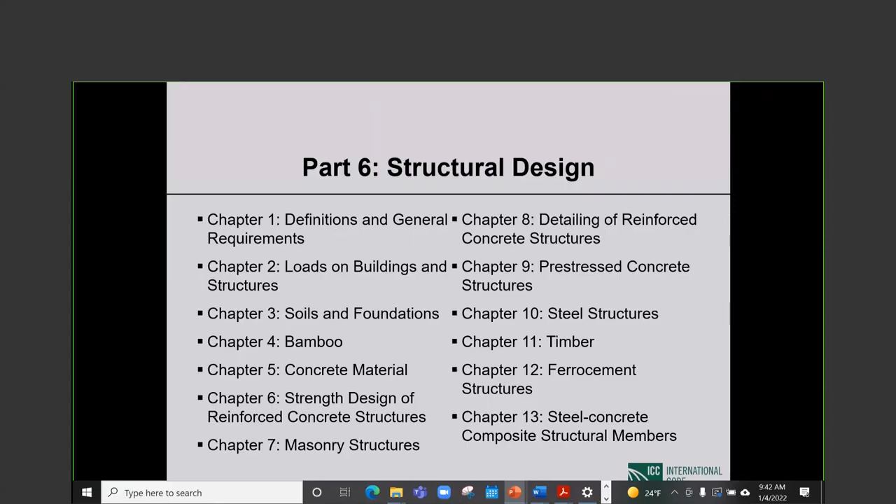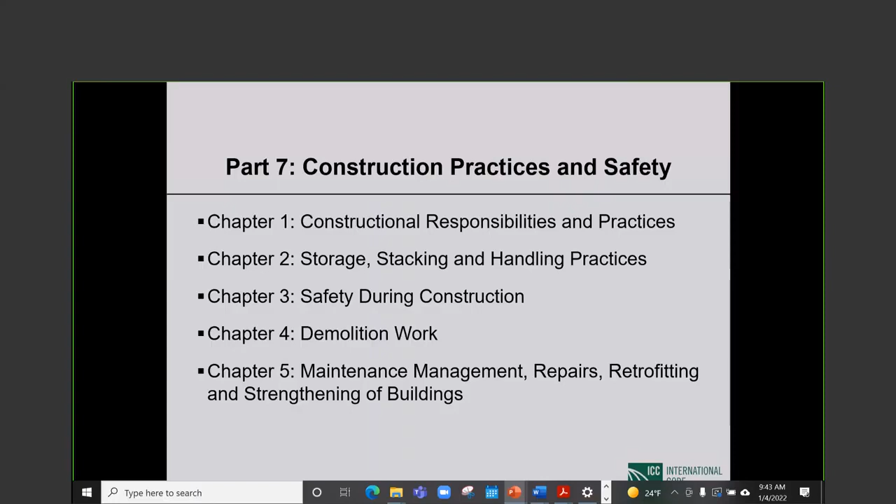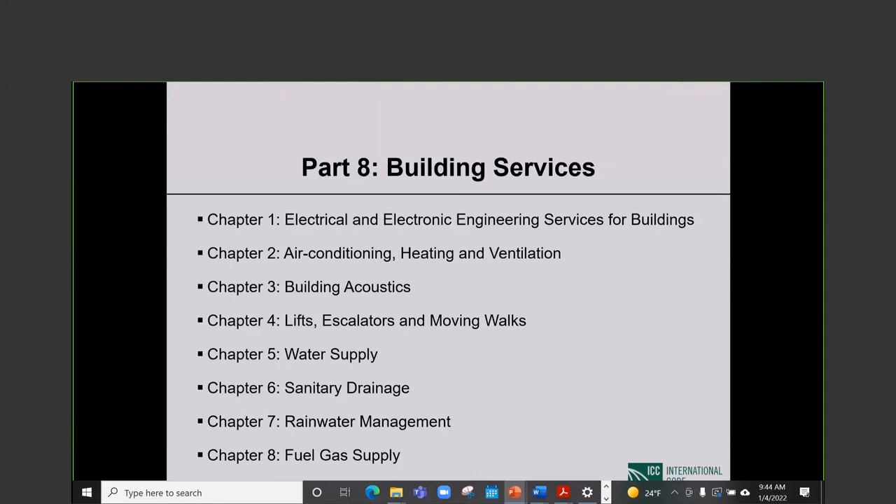Building services, part 8. This is a world unto itself, which structural engineers know very little about. Electrical and electronic engineering services for buildings, air conditioning, heating, ventilation, building acoustics, lifts, escalators, moving walks, water supply, sanitary drainage, rainwater management, fuel gas supply, electrical building services, lighting. We are listing these topics because these are covered in the code. I hope you keep that in mind, that we have code provisions that will govern the installation of lighting.

So lighting, load estimation, fitting fixtures and accessories, wiring, substation and transformer, distribution system, switch and switchboards, overcurrent and short circuit protection, fire protection, alarm and emergency lighting, earthing, lightning protection, telecommunication, CCTV and access control system. HVAC, this is heating, ventilation, and air conditioning. So there is planning requirements, air conditioning system design, air distribution system, air conditioning equipment, refrigerating equipment, ventilation system, energy conservation, inspection, testing, and commissioning, operation and maintenance.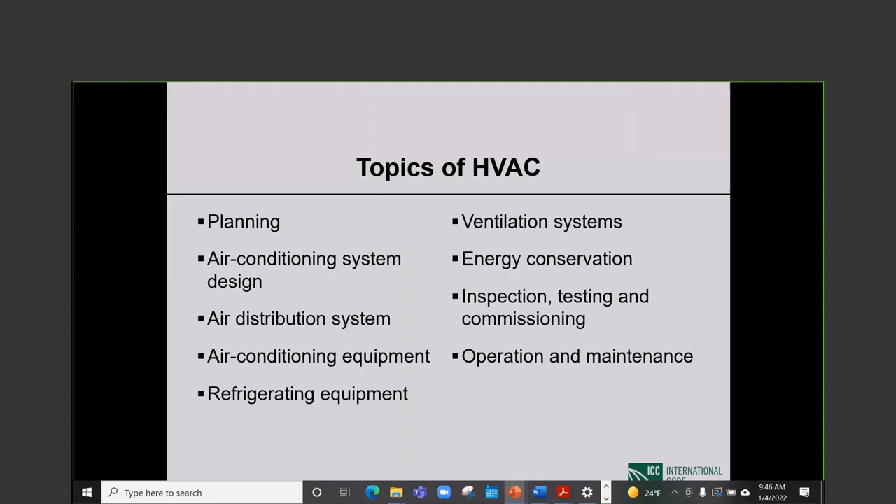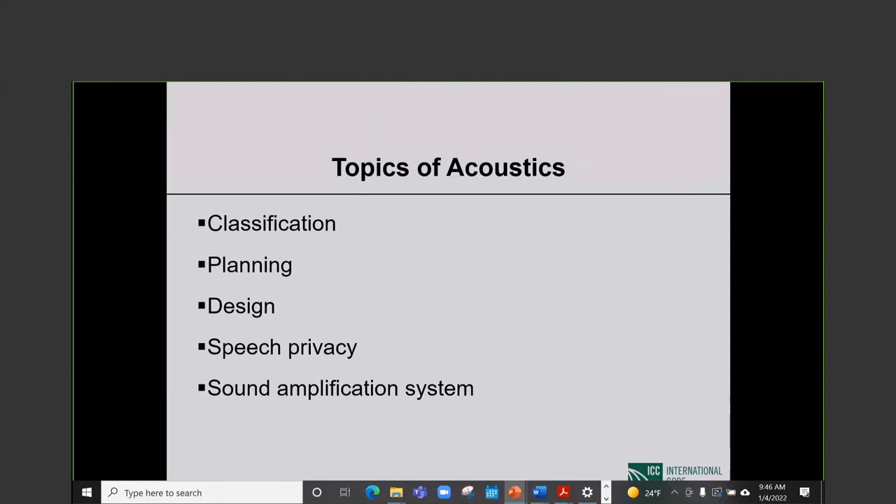I know that this kind of reading of a list is boring, but I hope that for a structural engineer or a civil engineer, this is in itself very good exposure to what the other professionals deal with, the electrical engineer, the mechanical engineer, all of whom have a role to play in the construction of a building. So this is what they're dealing with. Acoustics, depending upon the occupancy of the structure, can be very important. Obviously, if a building is for performances by artists, acoustics is one of the most important design criteria. Anyway, so under this chapter, classification, planning, design, speech privacy, and sound amplification system.

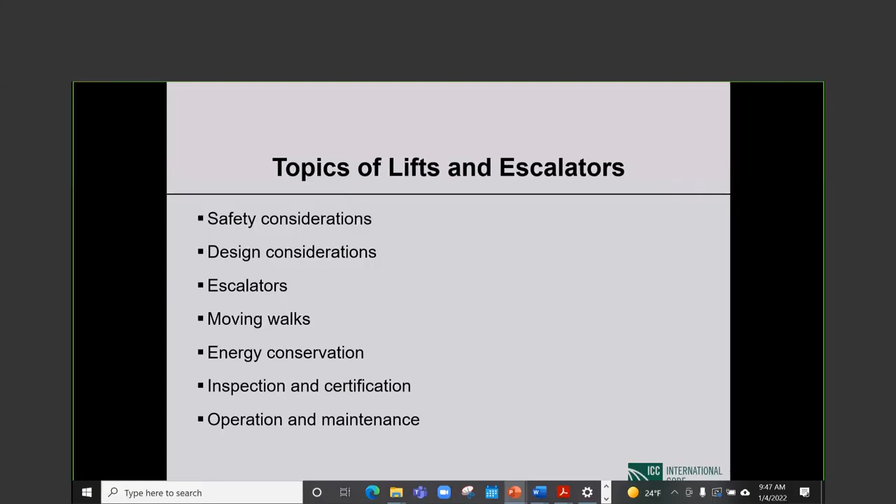Topics concerning lifts and escalators, safety considerations, design considerations, escalators, moving walks, energy conservation, inspection and certification, operation and maintenance. All of that is dealt with in the code. Topics of water supply. So there is permitting involved, licensing of plumbers, water supply requirements, estimation of demand load, water resources and quality, inspection and certification, water supply system, storage of water, design of distribution system, water distribution in tall buildings, which has its own challenges. Obviously, you have to pump it up long distances.

Hot water supply installation. I do not know how common it is in Bangladesh, but hot water is definitely needed anyhow. Pipe work, cleaning and disinfection.

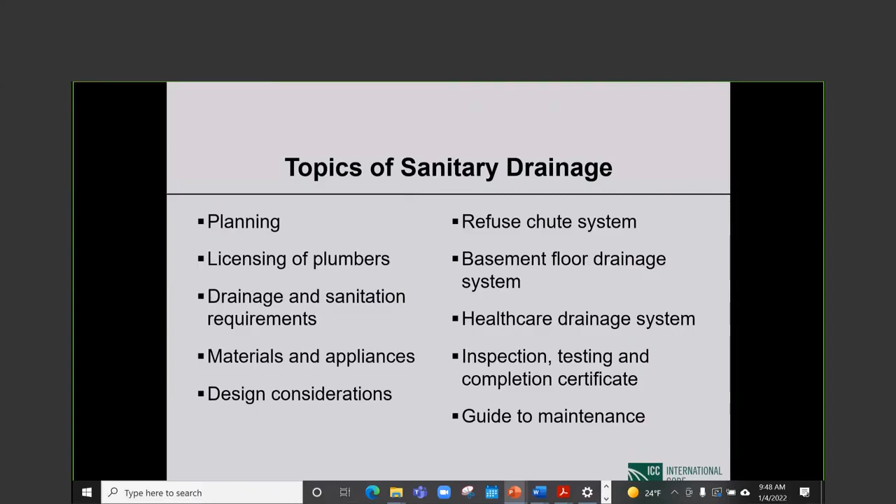Sanitary drainage: again, planning is involved, licensing of plumbers, drainage and sanitation requirements, materials and appliances, design considerations, refuse chute system, basement floor drainage system, healthcare drainage system, inspection, testing, and completion certificate, guide to maintenance. The last number of slides simply gives you an idea of the scope of BNBC, how comprehensive a code it is, and the stuff that it deals with.

Rainwater harvesting, for instance. It is becoming increasingly important, conservation of resources, and it is pretty remarkable that the code has specific provisions concerning that. So rainwater harvesting requirements, rainwater harvesting planning, licensing of plumber, rooftop rainwater harvesting is treated separately, artificial groundwater recharge, drainage and sanitation requirement, materials and appliances, construction, inspection, testing, and completion certificate, guide

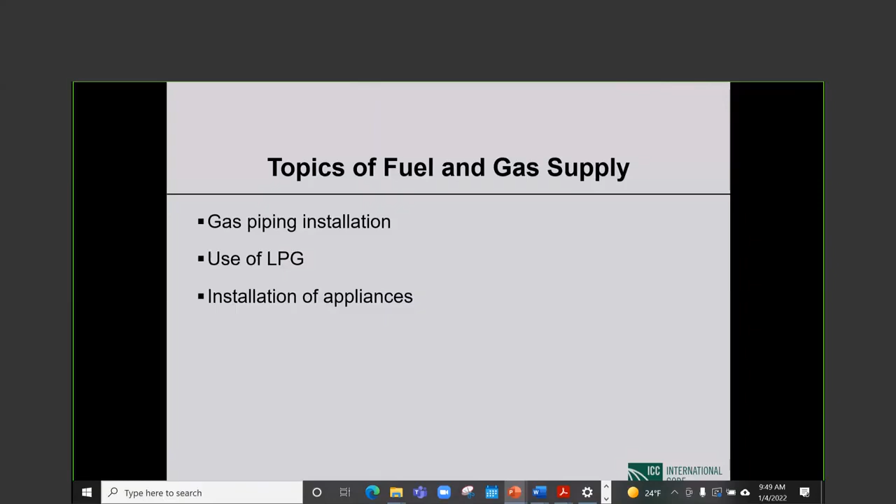to maintenance. And then fuel and gas supply, the gas piping installation, use of liquid petroleum gas, and installation of appliances. Then the very important topics of alteration, addition to, and change of use of existing buildings. Not a lot is laid on the slides, but please pay close attention. This is very, very important stuff. Okay, alteration, addition to, and change of use of existing buildings.

So chapter 1 deals with applicability and implementation. Chapter 2 deals with evaluation and compliance. Chapter 3 deals with, very interestingly, conservation. You don't find that in too many codes, this topic of conservation. So applicability of the provisions. No change in use shall be made without permission from the permitting authority. This is extremely, extremely important. Okay, so you need a permit from RAJUK to do a change of use of your building. You cannot do it on your own.

No change in use shall be made without permission from the permitting authority. No addition shall be made without permission from the permitting authority. First was change of use, second is addition. An existing building shall not be altered in such a manner that results in the building being less safe or less sanitary. So an existing building shall not be altered in such a manner that results in the building being less safe or less sanitary.

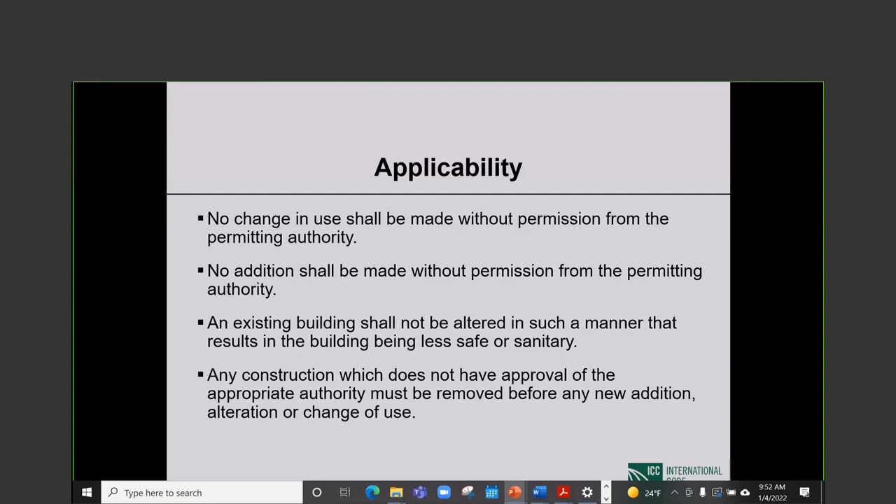Any construction which does not have approval of the appropriate authority must be removed before any new addition, alteration, or change of use. Okay, I'll read it again. Any construction which does not have approval of the appropriate authority must be removed before any addition, alteration, or change of use. So everything said on this page I consider to be highly, highly important.

For the proposed works relating to alteration, addition to, and change of use, the owner of the building shall cause the existing buildings to be investigated and evaluated by competent professionals. This is extremely, extremely important. I could not overemphasize the importance of this evaluation. So for the proposed work relating to alteration, addition to, and change of use, the owner of the building shall cause the existing buildings to be investigated and evaluated by competent professionals.

Very important. The results of the investigation and evaluation shall be submitted to the building official. The building official shall determine whether the proposed additions, alterations, change of use complies with the provisions specified in this code, meaning BNBC 2020. Conservation, as I said, not very common in codes, but BNBC has conservation in it.

Conservation is the process of retention of existing buildings or groups of buildings, landscapes, etc., and taking care not to alter or destroy character or detail, even though repairs or changes may be necessary. This is very, very important. So you need repairs, otherwise things decay and just disintegrate. But conservation means that you try not to change the character. That's conservation. Process of retention of existing buildings or group of buildings, landscaping, etc., taking care not to alter or destroy character or detail.

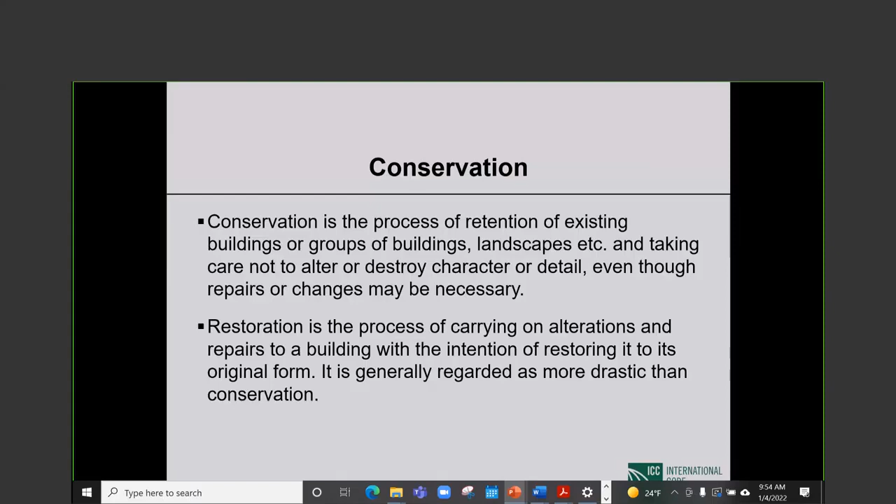That's okay. Restoration, that is conservation. Restoration is the process of carrying on alterations and repairs to a building with the intention of restoring it to its original form. It is generally regarded as more drastic than conservation. It definitely is more drastic than conservation. Okay, conservation, you don't try to do too much. Restoration is the process of carrying on alterations and repairs to a building with the intention of restoring it to its original form.

Guidelines to conservation. Be reversible and repeatable. The reversible part: so you need to paint a part of a building. You try to paint it. You try to make the paint look as close as possible to the original paint. Now, how are you going to reverse it if it turns out to be more different? But that's the idea. To the extent that you can reverse it, that is to be aimed for.

And repeatable, meaning you should be able to do the same thing. Like another wall needs painting, you should be able to repeat what you did to the first wall. Not prejudice a future intervention. That's kind of important. Whatever you do, if more needs to be done to the structure at a future date, you should not make that difficult by your conservation measures.

Not hinder the possibility of later access to all evidence. Evidence meaning, what might have happened by way of deterioration, cracking, this, that. You shouldn't hide those things. Allow the maximum amount of existing material, be harmonious in color, tone, texture, form, and scale. All that makes sense. That's conservation. Harmonious in color, tone, texture, form, and scale.

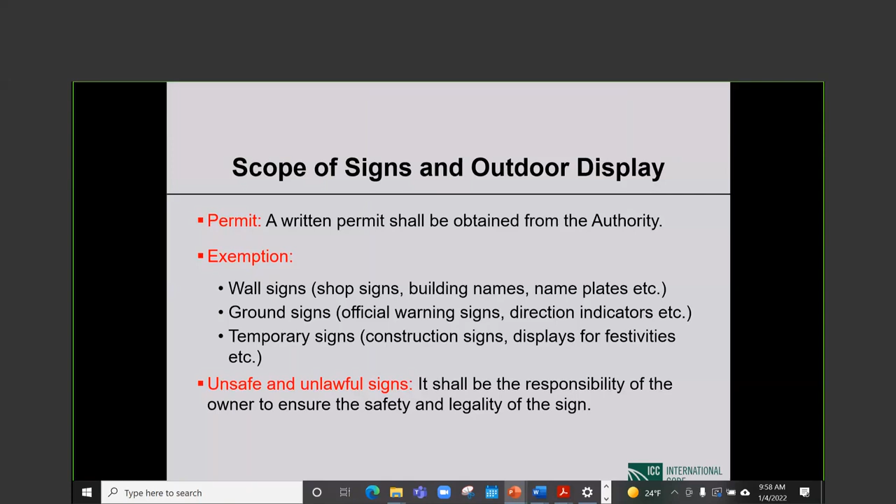Unsafe and unlawful signs: it shall be the responsibility of the owner to ensure the safety and legality of the sign. That probably goes without saying. Restrictions on signs and outdoor displays. So there may be restricted sign zones designated. Prohibition on advertisement. If there is prohibition, you obviously cannot violate that. Signs on highways and roads, there are restrictions on what you can and cannot do. Illuminated displays, again, there are restrictions. Location restrictions. Projection over public property, that obviously should be restricted. And clearance from power lines, that is extremely, extremely important.

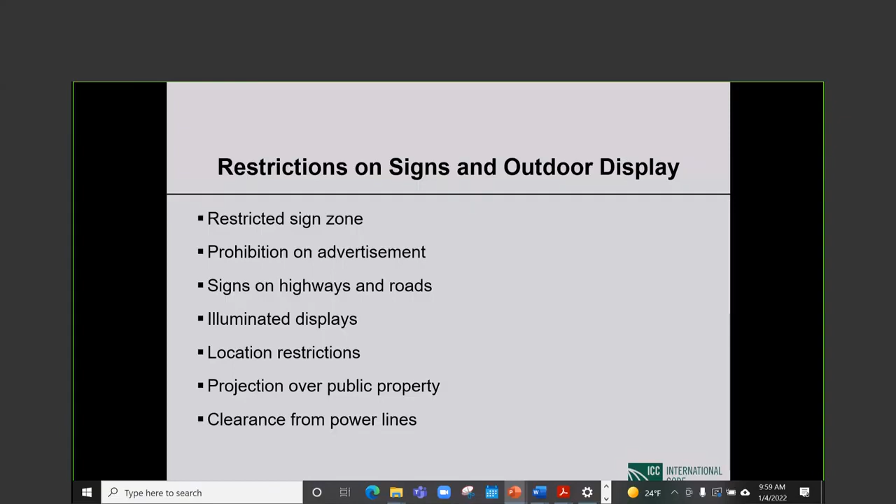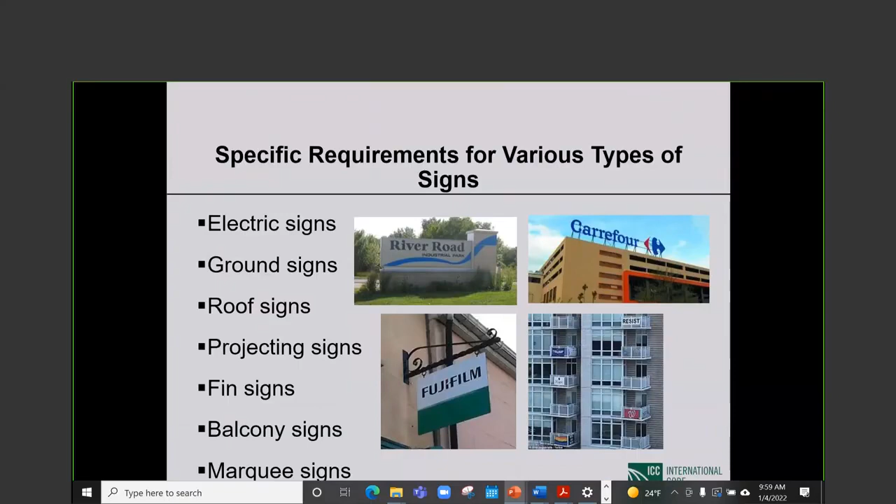Specific requirements for various types of signs are given in BNBC 2020: electric signs, ground signs, roof signs, projecting signs, fin signs, I don't even know what they are, balcony signs, marquee signs. That brings us to an end. So again, the second part was material prepared by Dr. Rakib. I did make some modifications here and there. Anyway, as I said, Dr. Rakib would have done it better, but under the circumstances, I thought I would do it.

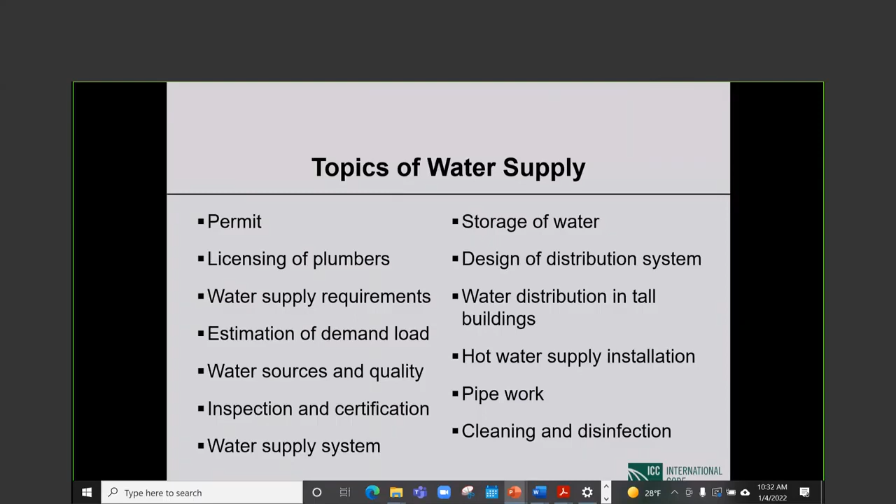Is it total floor area or each floor area considered in case of categorization of buildings to be supervised or designed in BNBC 2020? He's referring to slide number 52. Can you take me back? Just press escape. How do I know when it's slide 52? There is no slide number. Okay, well this is 40 or 56, I've gone too far.

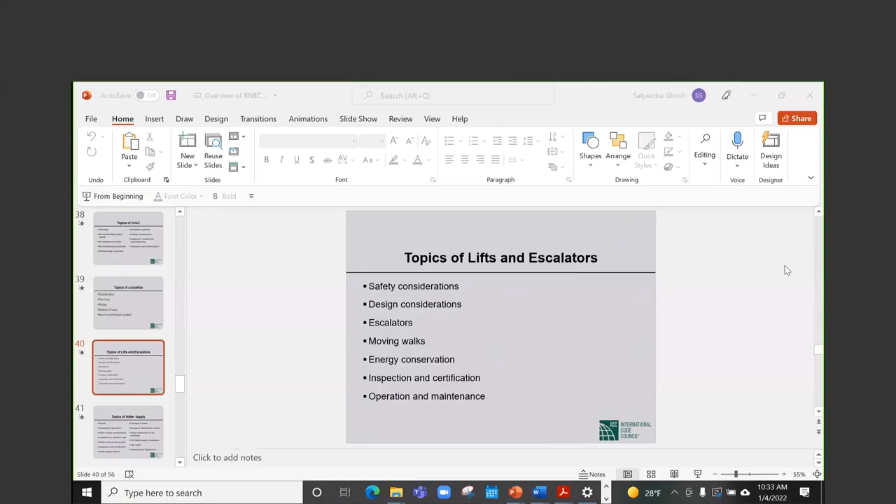So what's the question - is it total floor area or each floor area considered in case of categorization of buildings to be supervised or designed in BNBC 2020? We will post an answer, because I don't want to answer without looking at the provisions. Dr. Rakib might know, but I don't deal with the fire related provisions.

I think the next question is also something Dr. Rakib will answer easily - it is, in BNBC 2020, how much live load is considered for mosque? I did not get into the live load phases, let me see if I can easily find it. I probably can find it, but it will be easier to post it.